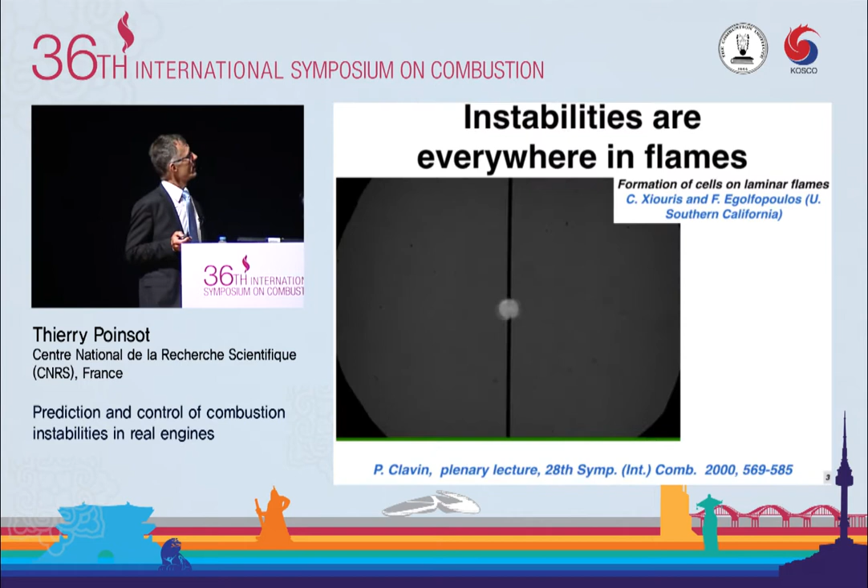Instabilities are basically everywhere in combustion. Even for the simplest problem of making a small spherical laminar flame, very rapidly, instead of having a smooth surface, you end up having wrinkles everywhere, cells, and all these cells are going to make our life very complicated because this device, for example, is used to measure flame speeds. Right away, you see that even at the smaller scale, you have instability problems.

If you go to large scales now, you also have instabilities. If you try to do a pool fire, you're going to see these big puffs, for example, which are due to the coupling between combustion and buoyancy.

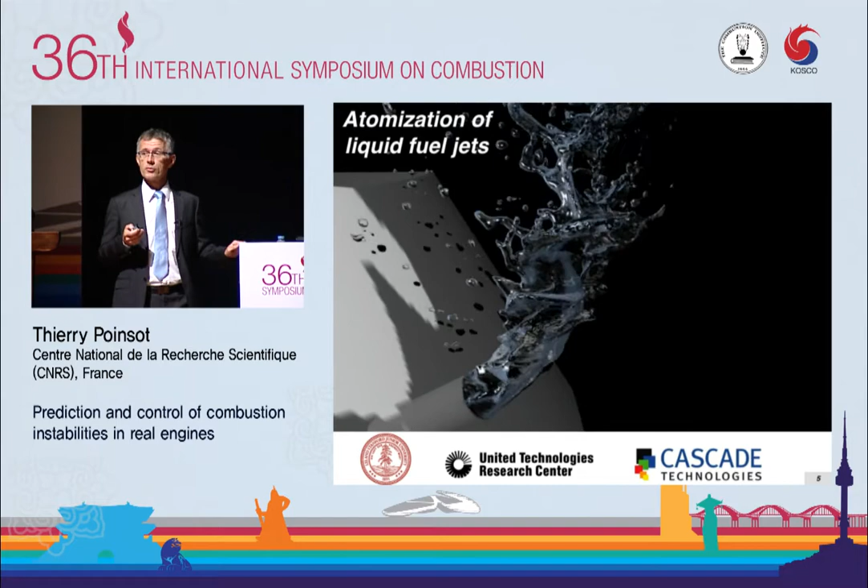Now, sometimes instabilities are useful. If you want to atomize, for example, a liquid jet of fuel, it's very useful to have instabilities at the liquid-gas interface, and we rely on this instability to produce the droplets, which we will later burn. There will be a lot of acoustics today, so you see it's already happening.

So now, among all the instabilities in this combustion world, one of them is unpleasant: thermoacoustic instabilities. Why? Well, because they basically break engines. I will show you that today.

And these instabilities are due to a coupling now between acoustics, like this one here, and combustion. There's been quite a few very good review papers and books, including plenary lectures at the Symposium, and my objective is not to repeat them. I just need, for a few minutes now, to introduce the basic mechanisms which lead to thermoacoustic instabilities.

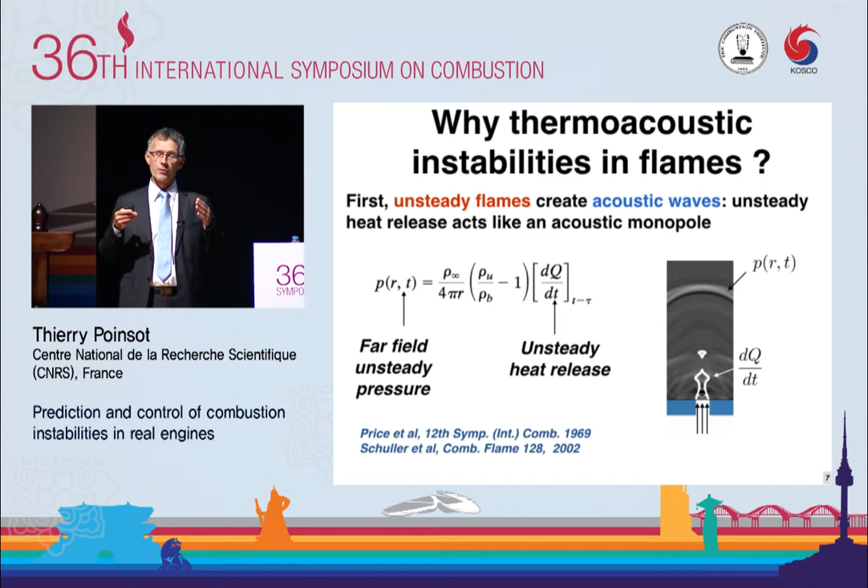So the first one is the fact that flames produce acoustic waves. There will be a few equations today, not many, but I just want to focus on that one for the moment. If you have unsteady heat release in a flame, then it's quite easy to show that in the far field of a flame like this one, you're going to have sound. So a steady flame does not make noise, but if a flame starts moving, it will make noise.

It's beautifully illustrated on this movie here, where you have a Bunsen flame which is pulsated and oscillates, and you see that every time you have a change in flame surface, so every time you have a change in heat release, you make these huge acoustic waves here, which are visualized by the divergence of the velocity.

So that's one part of the problem. The other part of the problem is that flames are also very sensitive to acoustic waves. If you send, for example, acoustic waves onto a flame—this is again a simple Bunsen flame—you have this kind of behavior. You can see how the flame here is modulated by the sound that you send.

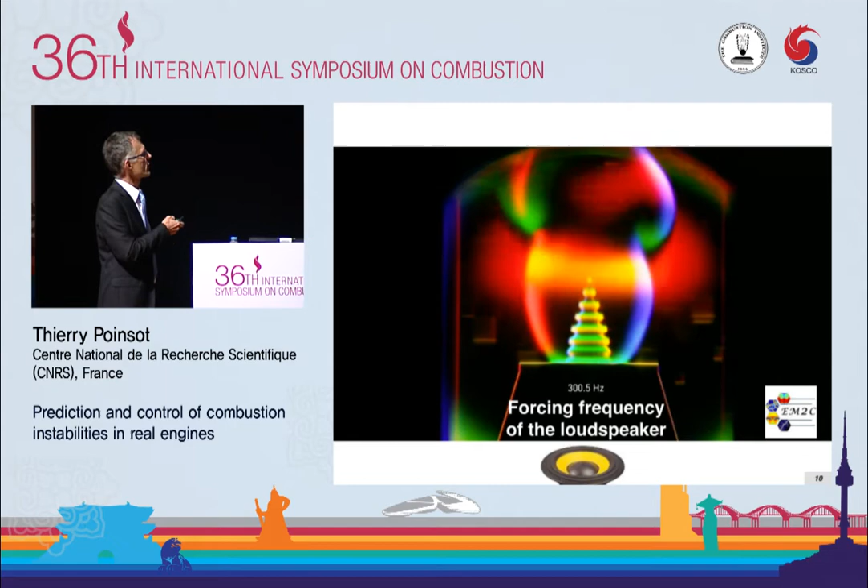You don't have to send only harmonic waves, you can also send music if you want, the result will be the same. You see how the flame reacts to that.

Now, if flames are influenced by acoustics, and if flames influence acoustics, then there's this possibility that you can have a resonant loop between these two phenomena if certain criteria of phase and gain are satisfied. It's not always happening, but when it does, the level of noise increases, and then you end up with these kinds of things here.

By the way, you see the main problem of people working in this field is that they become deaf after a short time. And you see how unpleasant it is. Now, this is a small engine—it's not an engine, actually. It's a lab-scale experiment, which is built to resist. If this happens in a real engine, then you have a major problem.

Now, this is another view of another experiment. That's from the 80s, the experiment of Berkeley, where you have a flame stabilized behind a backward-facing step. And you see that for this case here, you have a very strong unstable mode where the flame flashes back into the inlet. And we now know more or less the mechanisms here.

The mechanism is the following: you create a large vortex. This vortex will burn. When it burns, it will produce acoustics, as I've said at the beginning of this talk. These acoustic waves will create a new change of the flow rate here, which will create a new vortex. And in certain conditions, this thing basically gets self-amplified.

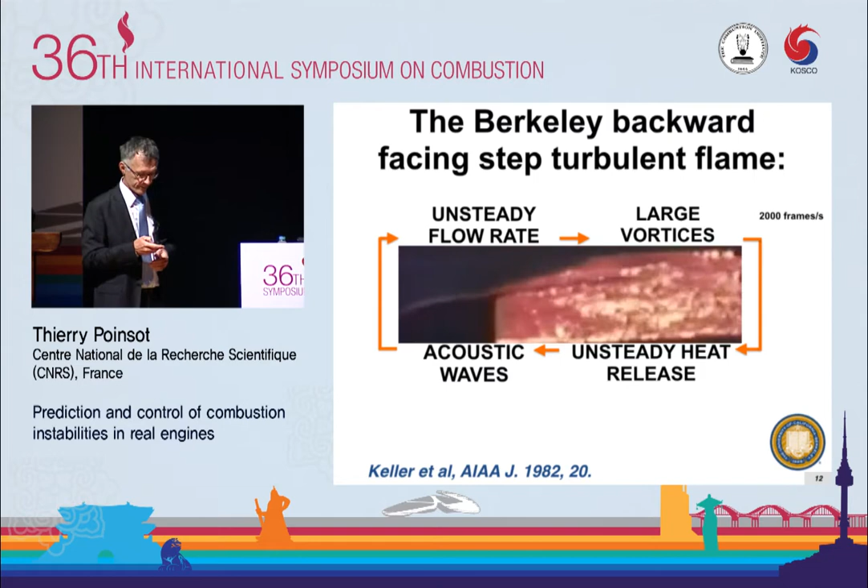Note that in a system like this, at certain instants, the velocity becomes negative. That's why the flame is actually flashing back. So it's a combustor where the flow exits the combustor through the inlet. And I think everyone understands that it's a bad idea.

Now, if this thing wants to move, why do we need to discuss real engines? Well, it's because we need to move away from lab-scale systems to this kind of engine. Because in this engine, if we have a combustion instability, it's not an interesting research problem anymore. It's a major problem, a major risk in terms of the program itself. So this is why we need to discuss this kind of problem.

The most famous example of a big problem related to instability is the Apollo program and the F1 engine. The F1 engine was built from a smaller engine. It was upscaled, and then it became unstable. There's a very nice paper by Oefelein and Yang which summarizes all the methodology used at the time to try to fix the problem.

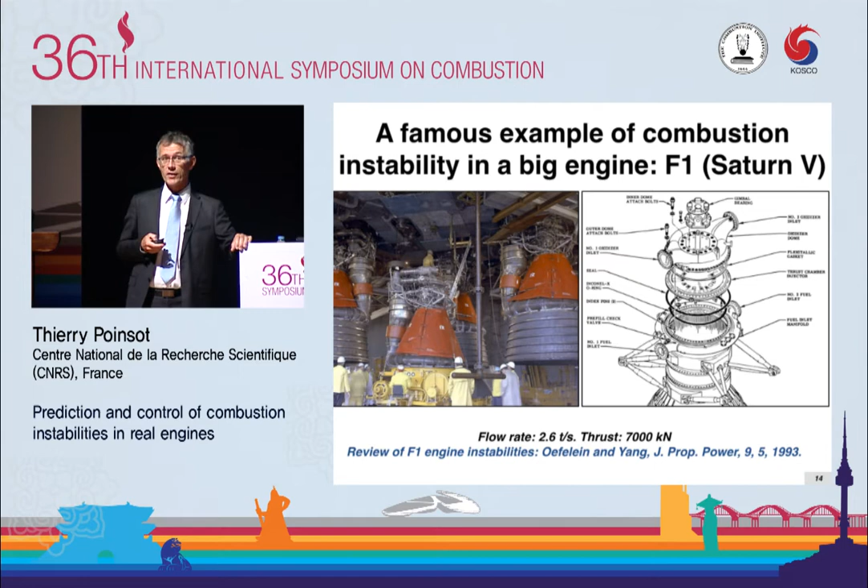To make it short, what you have to remember is that those guys had to do more than 1,000 full engine tests. That's not a lab scale, it's the real engine, to try to find a way to fix the problem. The way to fix the problem was to change the injectors. Let me go back here. Change the injectors, add some baffles to damp the acoustic waves. The way they did it was basically by trial and error. So it lasted 2 years, and the cost was amazing.

So this is why acoustic combustion instabilities are not just a curiosity and an interesting fundamental problem for the combustion community. They are a major risk. And today, the situation has not changed. If you build a new engine, you have to face combustion instabilities at some point.

Now, my objectives today are to present quite a few examples of instabilities in real engines. I will also describe results obtained in lab-scale experiments when they are relevant for real engines. And I will use 3 methods to do that: experiments, LES (large eddy simulation), and theory.

Experiments, that's an interesting problem right away. If you do experiments in the lab, you know that today we have methods to measure full 2D, even 3D fields of species, radicals, flame position, velocity, and of course pressure.

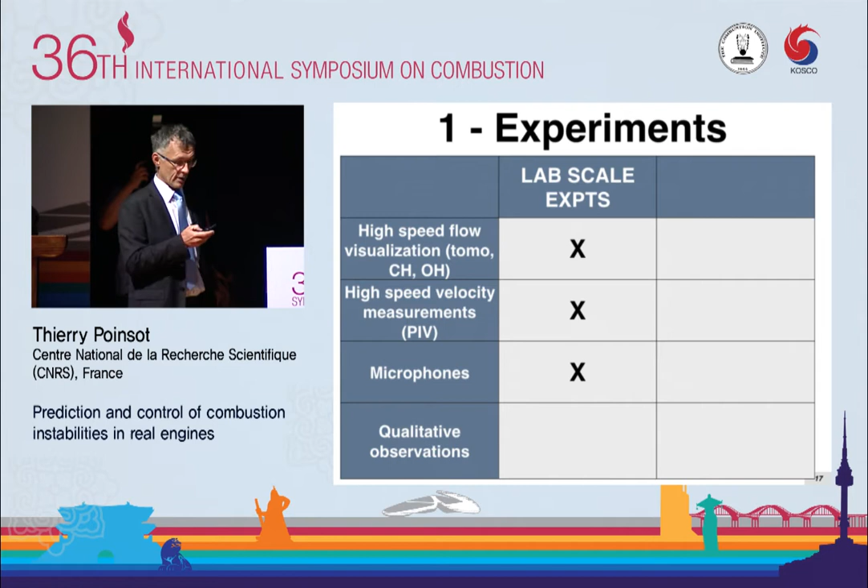If you go to a real engine, well, usually you don't have that. In most cases, what you have is that this engine makes noise, or it vibrates too much, or it's just exploded, and we don't know why. In the best case, you're going to have maybe pressure measurements, microphones. But that's all you have. You don't know what's going on inside. So you're basically blind as far as it goes to the problem of what are the unsteady phenomena in this engine.

So here you need something to put your eyes inside the engine, and this is where the LES comes into the picture. LES is a way to create a virtual burner. In that case, we'll be able to use LES to probe what's going on inside the burner. And the LES revolution, maybe 10 years ago, has allowed us to build things which look - they are not exact of course, but they look like the real engine, and they capture most of the unsteady activity in the engine so that we can actually use them to try to understand what's going on.

So it's actually interesting to see that many companies in industry have moved or are trying to move today to LES, not to compute the mean flow or the pollutants, but usually the first motivation is because they are afraid of combustion instabilities. And they know that the best method to try to control that is LES.

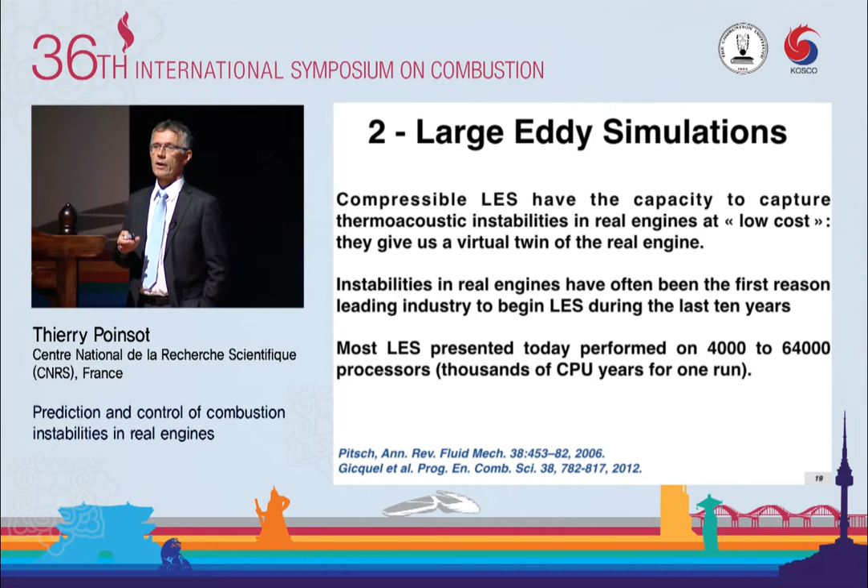Of course, this is only possible today if you have massively parallel computations. And most of the simulations I'm going to show today typically require thousands of CPU years. So it's not cheap, but compared to a real engine, it's still not that much money.

So the third method I wanted to mention here is theory, and I will insist today, and I would like to convey this message to the young people in the room. You might think that if you have all these nice computers and all these big lasers, we don't need theory. And actually, what I want to prove today, by multiple examples, is that we need more people doing theory in the combustion community. Just a pen and a paper, and we don't have enough people doing that anymore. We used to have many theoreticians in this community, and we don't have enough today. I will give examples of that.

So let me move now to the description of what real engines are. And I will basically try to illustrate that by comparing real engines to lab-scale experiments. So what is different if you try to study a full engine?

The first thing is that the Reynolds number and the Damköhler number are going to be much larger in a real engine because they're more powerful and larger. That's an obvious difference, but in terms of modeling it raises questions for us.

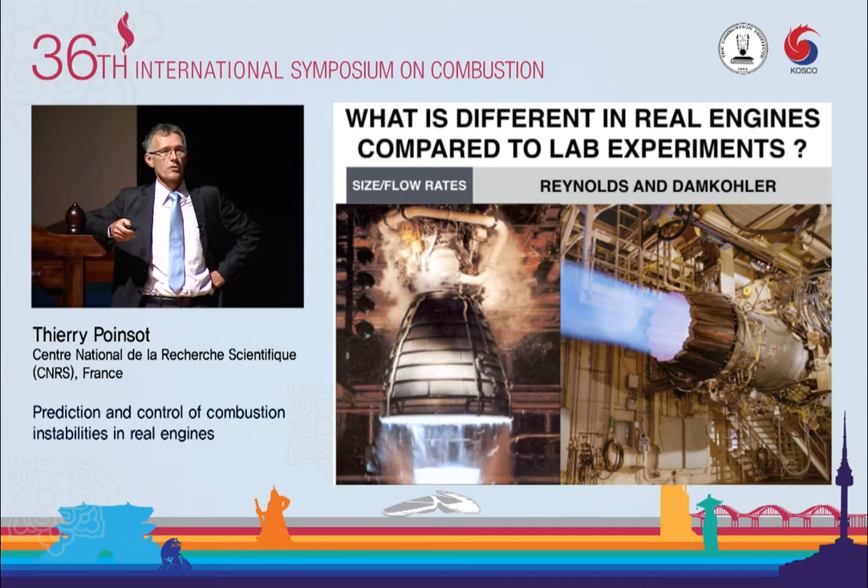The second difference is that the shapes of these chambers are different. This is an example of a lab-scale experiment, which we call the Volvo rig in this community. It's a rather simple experiment, but the geometry at least is simple: a long tube with a triangular flame holder. The flow there may be complicated, and this is an LES of this flow. The flow may be complicated, but the geometry is simple.

Now, if you go to a real engine, it's a different problem. The geometry is going to be complicated, and of course then we expect the flow to be even more complicated. That's for a gas turbine.

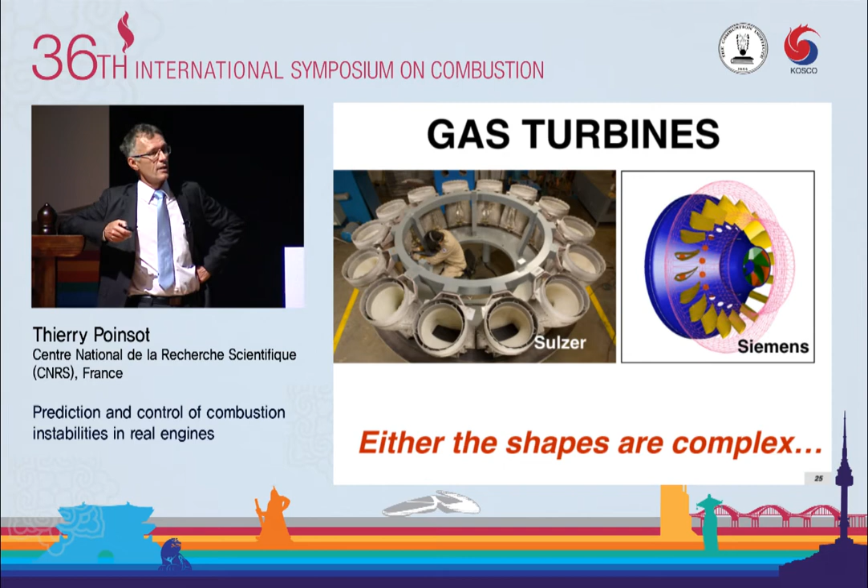If you go to a rocket engine, it's a bit different. The elementary piece here is a coaxial jet, where you inject usually one reactant in the middle, and around it you supply the second reactant. So that's a simple geometry, but unfortunately you have too many of them. In an engine like the Vulcain engine, you have 566 injectors. So that makes your life much more complicated.

Now, another difference is the regimes of combustion. I know that in this room, basically people are split into two categories: those working on diffusion flames on one side and those working on premixed flames on the other side. They even have separate workshops usually. In an engine, it's not working like this. We don't have premixed engines and diffusion engines.

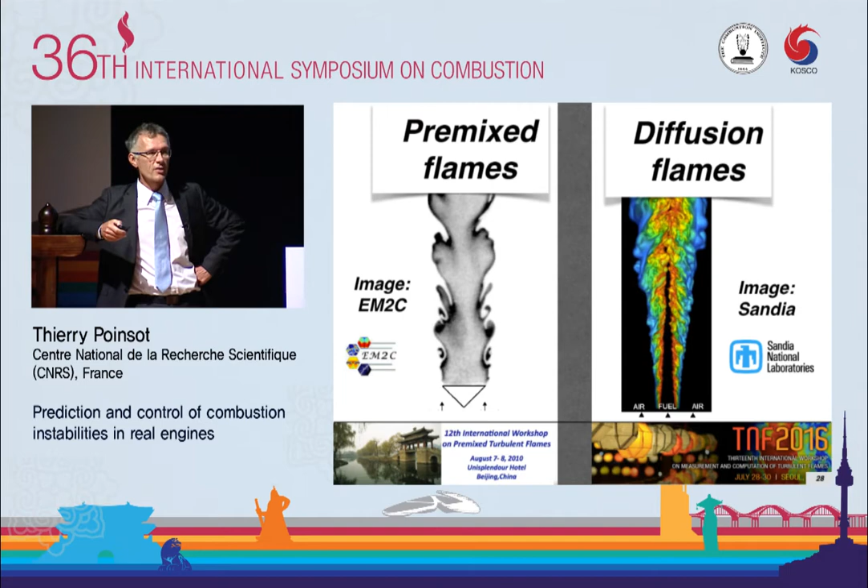If you look at a gas turbine like this one, and you do an LES of this thing, you find out that you have premixed flamelets at certain points, and diffusion flames at another one in the same flow. So we right away guess that most formulations, most models that we use are not going to work when we try to apply them in a full engine. So that makes things a little bit more complicated than what we can do in the lab.

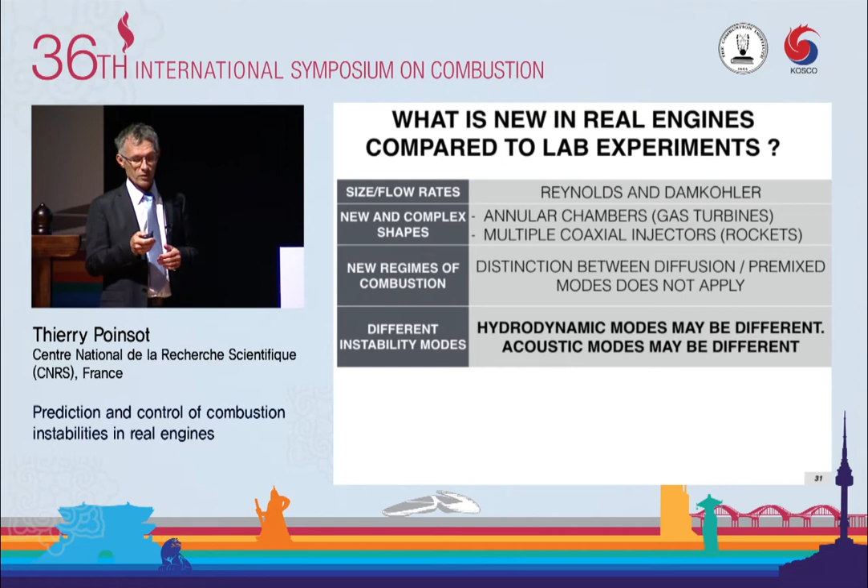Now, another difference is different instability modes. I will talk here about two categories of modes: hydrodynamic modes, vortices if you want, and acoustic modes. Let me start with hydrodynamic modes.

We know, and have seen for a long time, that in many thermoacoustic phenomena vortices play a big role. That was indicated even a long time ago, in this book by Reynst. Reynst was working on unsteady combustion before the Second World War, and even at that time he was plotting things like this, saying that if you create a vortex like that in a chamber, you have a big danger of going into some kind of thermoacoustic mode.

Actually, these vortices, this type of vortex, we saw a bit later. That's an old paper, an '87 paper, showing vortices created in a premixed chamber, and you recognize exactly this shape here. So that tells us right away that the way the flow can organize itself into coherent structures is important for thermoacoustics.

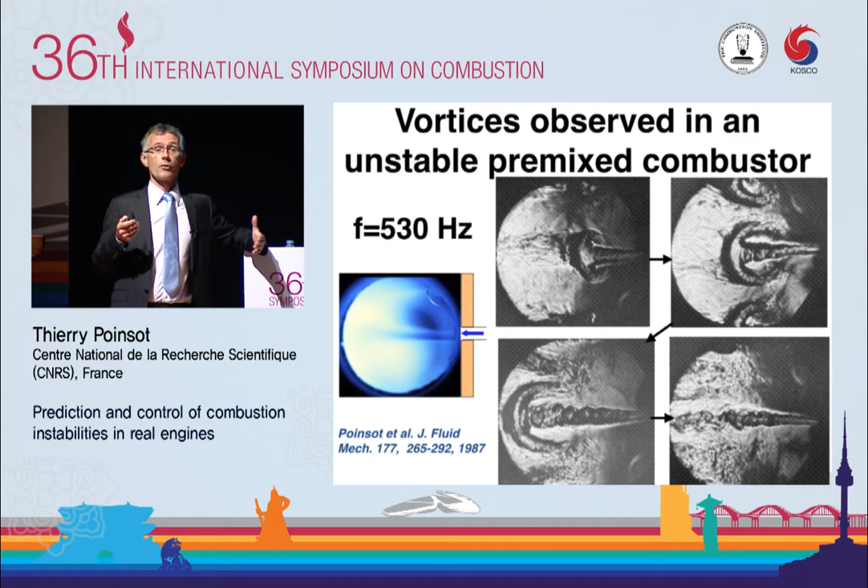Now, how do you study that? Well, people who do non-reacting flows have looked at that for a long time; it's called linear stability analysis. I'm going to take one example of such flow, taken by famous people here. Monkewitz, with Huerre, was one of the specialists of these studies.

You look, for example, at the flow behind the triangle here, behind the flame holder. The velocity profile will look like this, and the temperature profile will look like that. This is cold, TU; this is hot gases, TB. And you can write theory to look at how unstable this flow is going to be, which will depend on the ratio TB over TU, the temperature ratio.

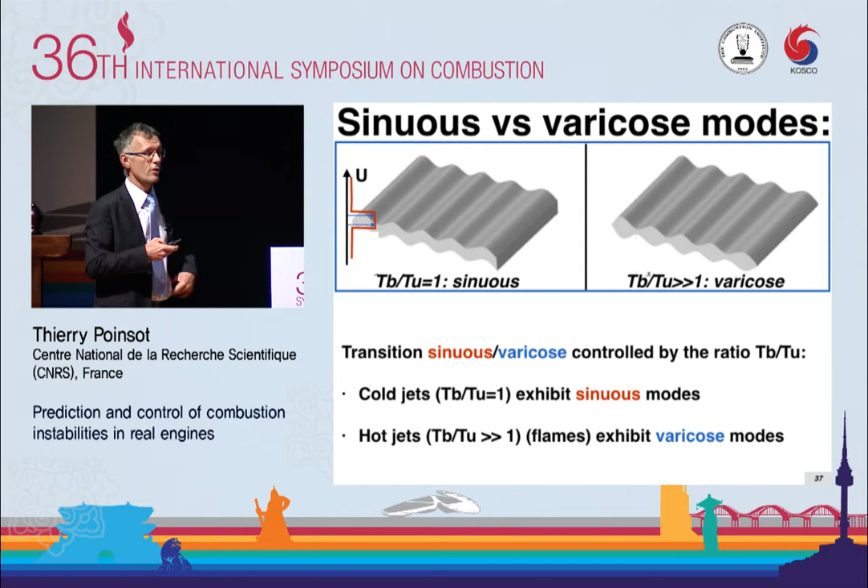When you do that, if you start by looking at a case where TB over TU is unity, so it's a cold flow, what you have is a sinuous mode—the flow organizes itself to have this kind of movement. But if TB over TU is larger, this movement completely disappears and you have a varicose mode instead, which is very different. And of course, you expect that in this case or that case we're going to have very different acoustic modes after that.

Now, interestingly, we should wonder what is the ratio TB over TU in practical cases. If you look at lab-scale experiments, you know that in most cases we use cold air.

We don't like to heat up the air, it costs a lot, so we use TU equal 300K. So TB will be of the order of 2000, meaning TB over TU will be like 6 to 8. But if you look at a real engine, it's different because there we compress the air to 700K or 800K, and usually we can have a lean flame too. So TB over TU can be anywhere between 1.3 and 3, maybe 1.5 to 3.

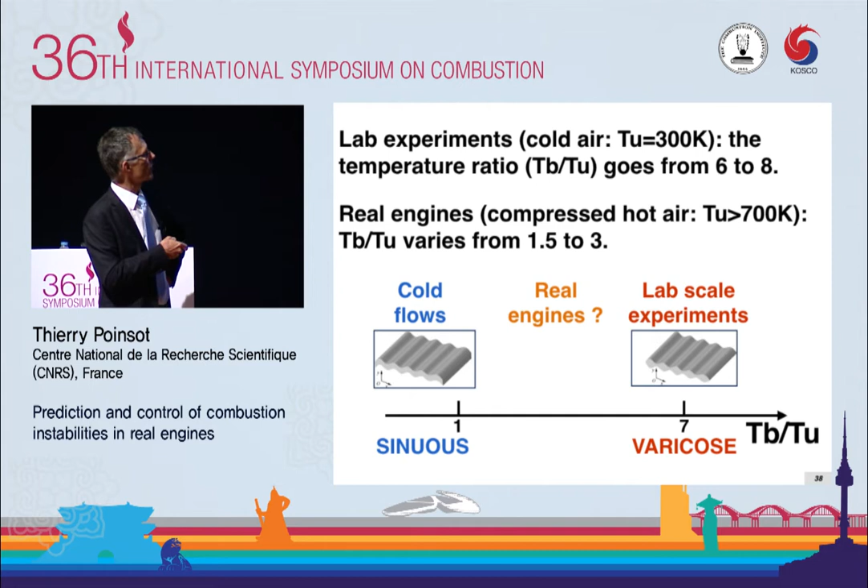This means that in the cold flow we have a sinuous mode, in the lab scale we have a varicose mode, and real engines are somewhere in between. This problem was studied by Emerson and Lieuwen a few years ago, and they showed that for TB over TU equal 2.4 you get something like a varicose mode, but if you go to TB over TU equal 1.7, you get a sinuous mode. This tells us that if we want to study real engines in the lab, we have to use the same temperature ratio, otherwise we're going to miss a very important aspect, because it's not going to trigger the same instabilities as the varicose mode.

Another big difference is related to acoustic modes. If you look at the literature on acoustics, you'll find that 95% of it is dedicated to low-frequency longitudinal waves, where the acoustic waves interacting with the flames are actually propagating in the same direction as the flow. If the flow is going that way, the waves are going upstream or downstream.

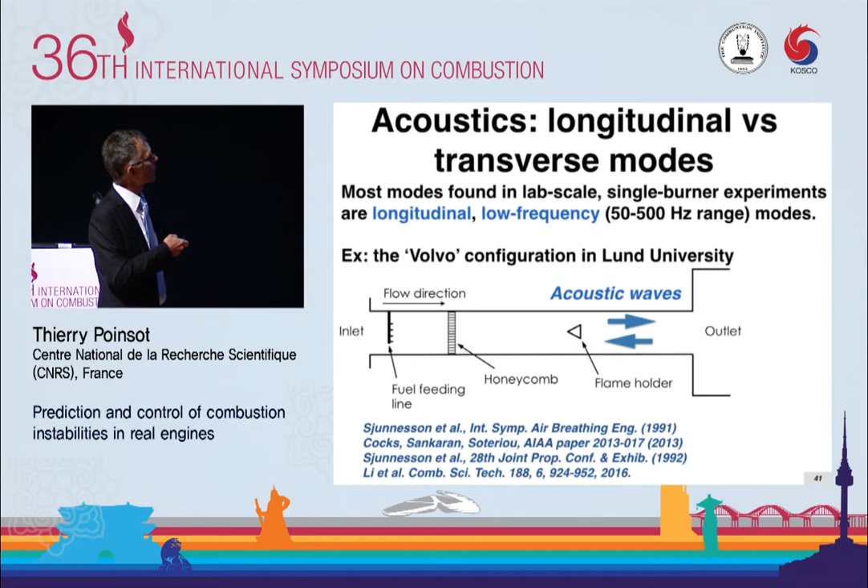Now, the problem is that in many cases, especially in real engines, you also have transverse modes. What is a transverse mode? It's the same thing, except that now the waves are traveling in the other direction. So instead of going in this direction, the acoustic waves actually propagate in this direction. And when they do that, they are usually at a higher frequency, of the order of 4,000 hertz for example, in that case, in the paper of Rogers and Marble.

Those waves have another characteristic, and it's that they are much more dangerous. If you trigger a high-frequency instability in an engine, usually you end up with an explosion after a few seconds.

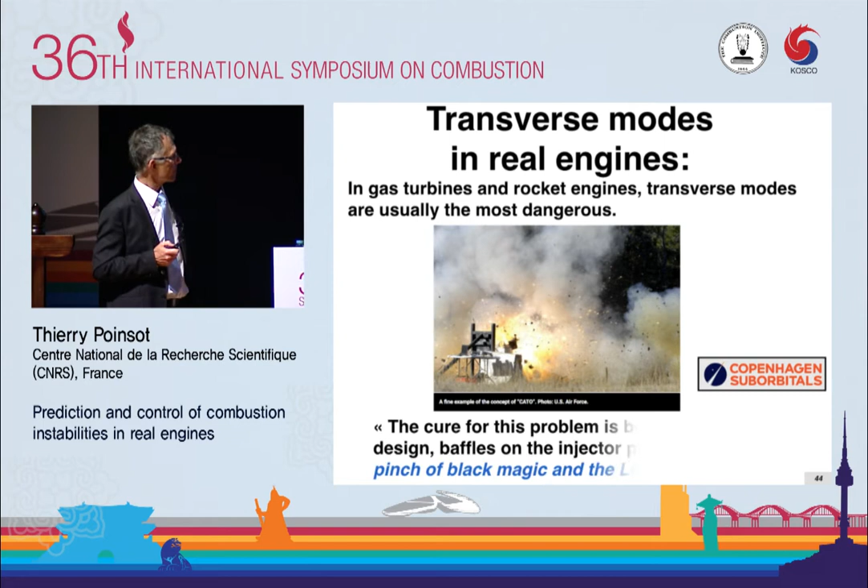I picked up here a sentence by this company, Copenhagen Suborbitals, telling you how much we know, how much we understand, and how we try to fix those problems. The recommendation of those guys is this one: if you want to fix this problem, you need to pray. And if you are managing a big industrial program, you realize that this will make you nervous.

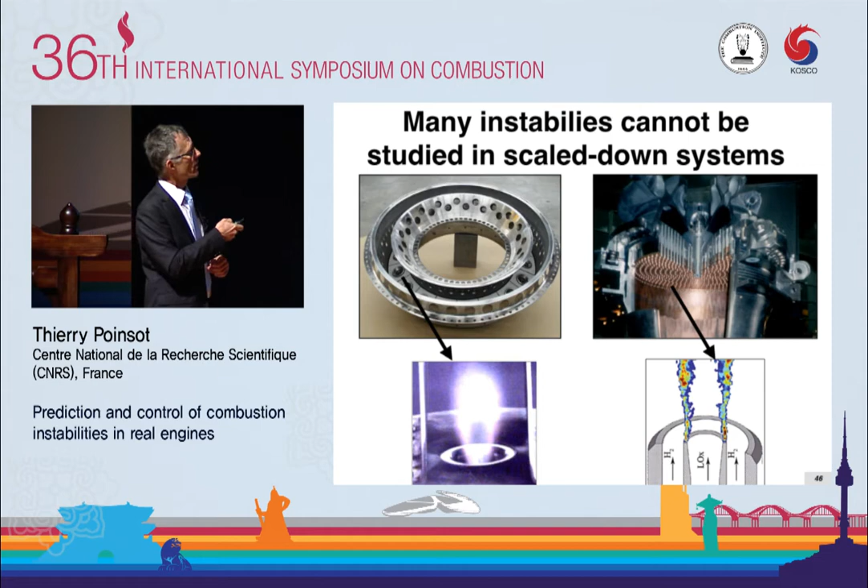Next step, of course, will be to say we need to understand what's going on in the real engine. Can we just take a piece of it to capture the instability modes, to try to study it in the lab? Unfortunately, that does not work. What you would like to do is take, for example, this gas turbine combustion chamber, pick up one injector, put it in the lab, and just study one at a time. Same thing for a rocket engine, you would like to pick up one injector and just study this one. But that does not work, because the acoustics will be different.

This was tested actually by Crocco a long time ago. He took a rocket engine and tried to block part of it, and what he proved was that every time you change the engine, you have a different unstable mode, even if you keep the same injector. So you need the full engine if you want to capture the acoustics. It's certainly not true if you want to do only mean flow studies, but for combustion instabilities, it's required.

Next difference is boundary conditions, and that's also a big one. As I've said, a lot of things were controlled by acoustics, which really means you need to know if a wave is leaving the combustion chamber, how much is going to come back. That's called the reflection coefficient, it's an acoustic notion, of course, and you have to determine that at the outlet and at the inlet.

In laboratory cases, it's kind of easy to impose boundary conditions. In many cases, we impose that the flow is blowing into the atmosphere, and we know that pressure is imposed, which is fully reflecting. And at the inlet, normally, if you have a serious experimentalist, he has a choke nozzle, so you know that the flow rate is imposed.

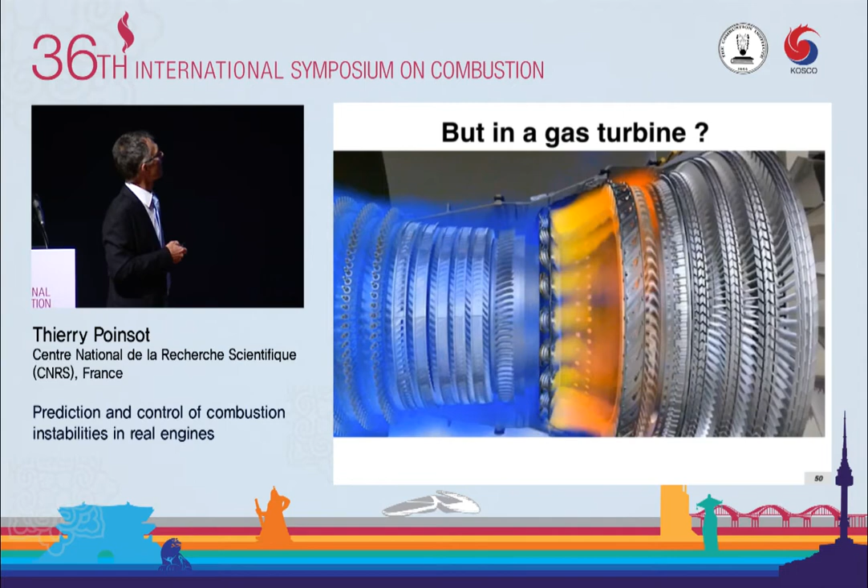But in a real engine, things are different. In front of the chamber, you have the compressors, and after the chamber, you get the turbine. So the chamber is surrounded by strange elements. On one side the compressor, on the other the turbine, and you need to know if waves propagate in this direction, how much is coming back. Same thing on that side. Otherwise, you cannot study the instability of this engine. So you need the reflection coefficients there.

And that, of course, is not a combustion problem anymore—it becomes a turbomachinery problem. You need to be able to do simulations where you send a wave into a stage of a turbomachine and see how much is coming back. In itself, that is a very complicated problem, which is not combustion, but you need it.

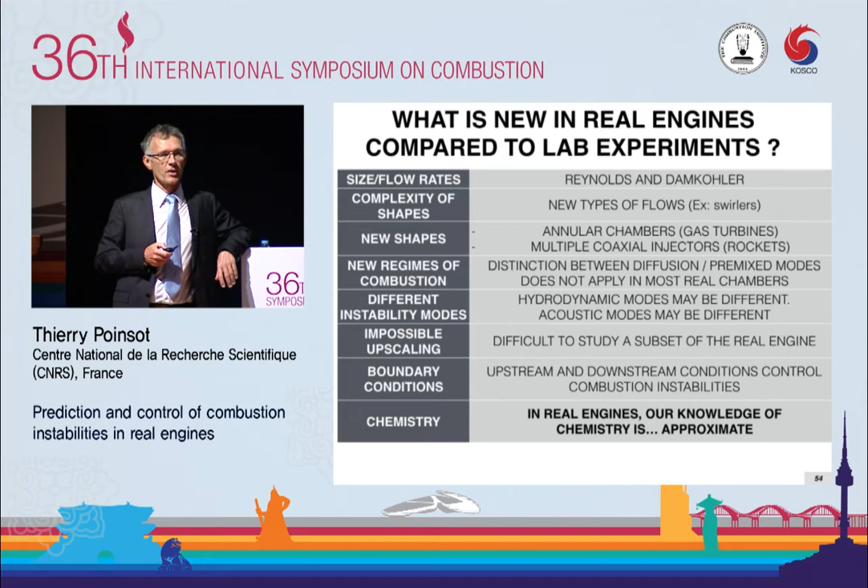I added this slide yesterday night because I know how many chemists would be in this room. I'd like to add that our knowledge of chemistry in this engine is very insufficient. That's a message to the chemists. I think everyone here will certainly argue about the flame speed of a methane-air flame at 300 K and 1 bar, okay?

I think Fokion will tell me it's 36 centimeters per second. Others will tell me 38 or something. But I don't really care about that. I'd like you to tell me what's the flame speed of this thing at 20 bars, 800 K, and an equivalence ratio of 0.5. Well, we don't have the answer to that in an experiment. No one does these experiments.

And if you run the usual full chemistry schemes, the error is not a few centimeters per second—the error is more like 200%. So if you want to do LES with that, you don't know what to do, basically. We don't know enough about chemistry here. And if you go to a rocket engine, it's even worse. At 120 bars, depending on the scheme you use, flame speed can vary between 20 and 40 meters per second. That's a big problem, because if we want to use LES, we need good schemes. If we don't have the chemistry, we cannot do anything. So that's a major problem too.

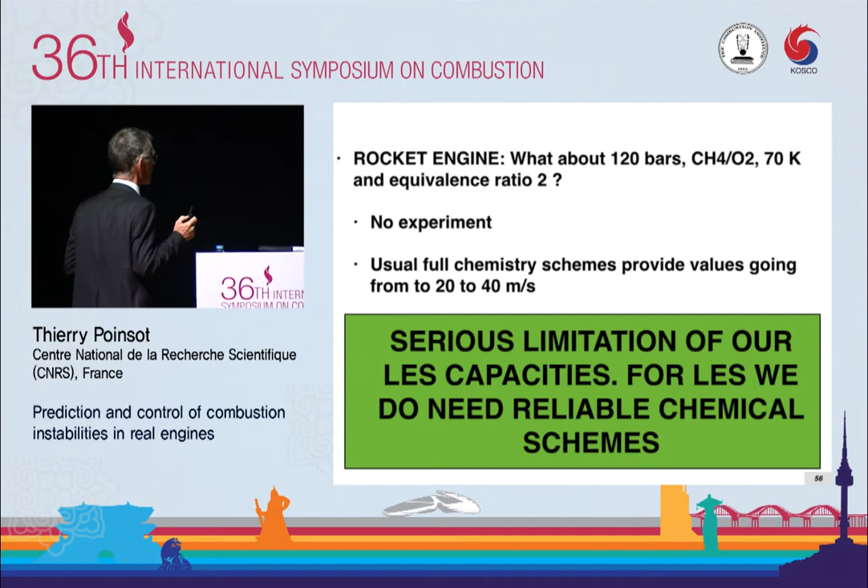Let me move now to the next point, which is gas turbines. You find gas turbines in many places. I want to describe a little bit the configurations here, and I'm going to do that using a result of a joint study between CERFACS, EM2C, Cambridge, and NTNU.

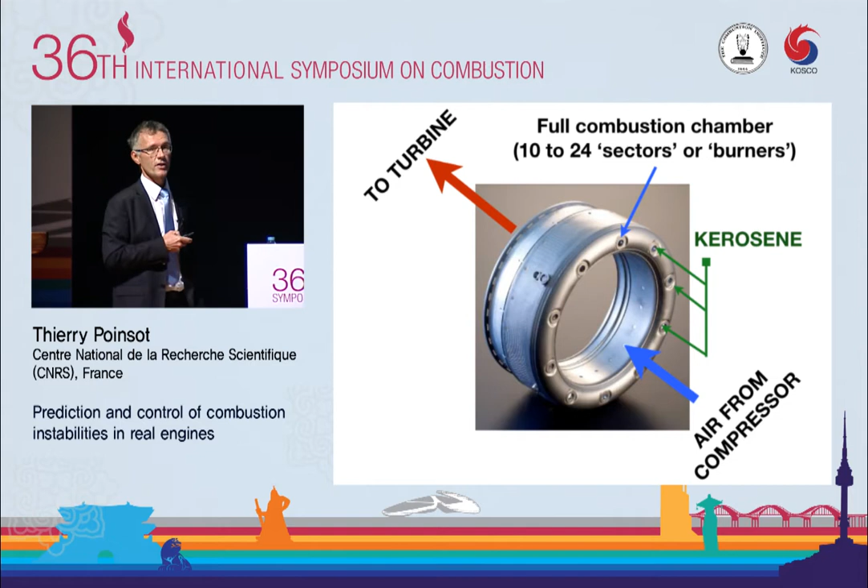To remind you how a gas turbine works, we have the combustion chamber here. The air comes from the compressor, goes to the turbine. We inject the kerosene in different places—it can also be methane. We have sectors here, and each sector corresponds to one injection of kerosene. In a given chamber, you can have 10 to 24 injectors.

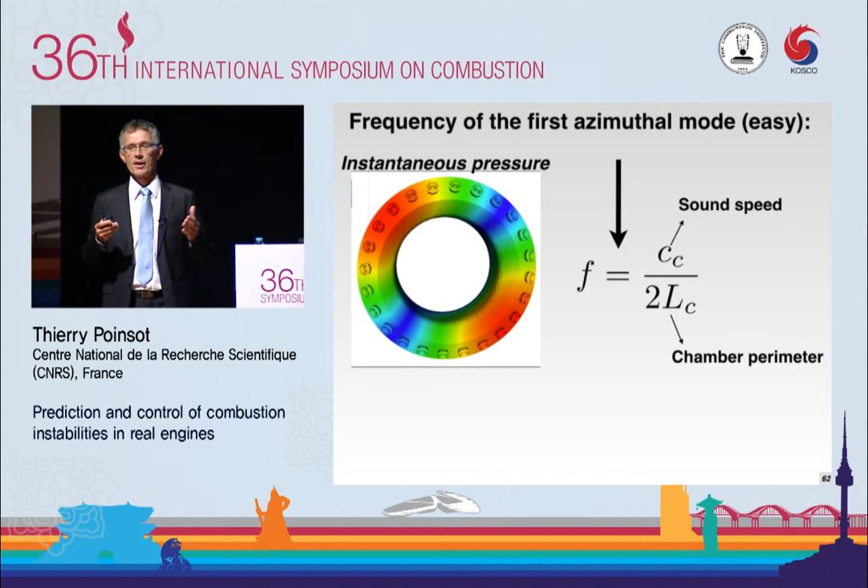A specific point about gas turbines is that they have this annular shape, okay? And since they have an annular shape, it's now allowed for acoustics to follow this path. So an acoustic wave can actually travel all around this chamber, meaning we can have an acoustic mode, and the first mode frequency can be obtained easily just by dividing the sound speed in the chamber, which is of the order of 700 meters per second, by the perimeter of this chamber.

So this number is usually of the order of 600 to 1,000 hertz. Actually, this mode is degenerate because there can be two modes—it can be turning in the clockwise direction or in the counterclockwise direction.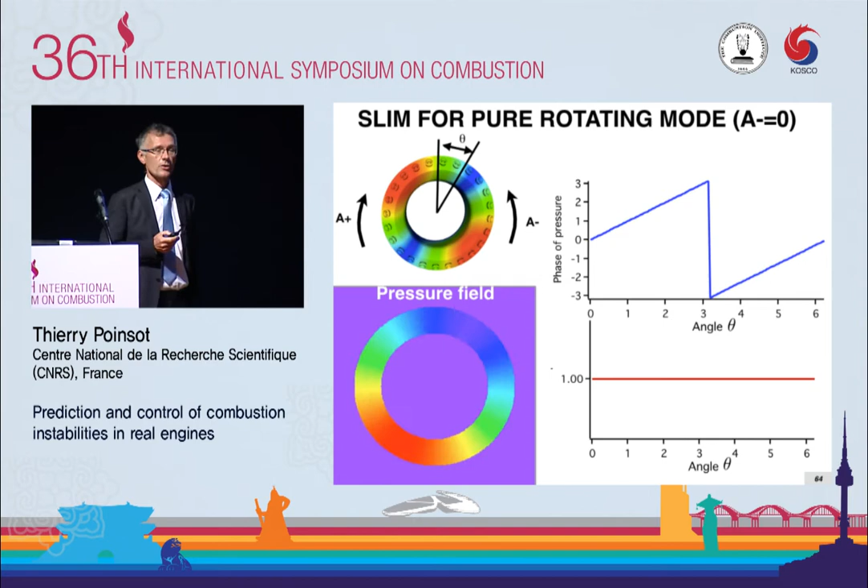If I take A plus equal A minus, we have now a standing mode. You can recognize pressure nodes here and here. And the phase now is opposite — this point is oscillating in an opposite way to that one. And if you have A plus and A minus different, you will have what we call a mixed mode, where the shape can be anything of that type.

In real chambers, what's interesting is that we find both standing and rotating modes. We don't really know why, though we have quite a few indications. We believe it's probably due to the amplitude of the instability or to the shape of the chamber, whether it is perfectly axisymmetric or not. The modes can also oscillate between standing and rotating in the same machine over time. So you can have a standing mode in this machine, come back one second later, and then it will be turning.

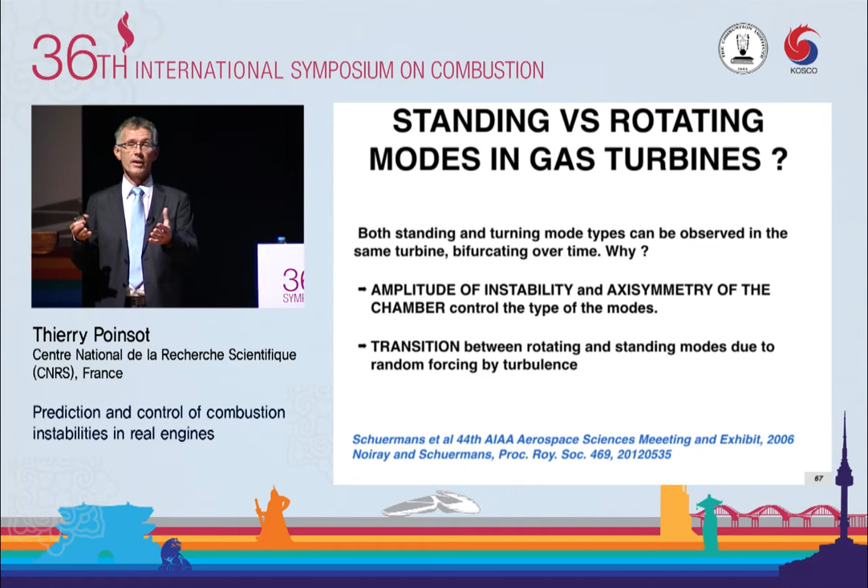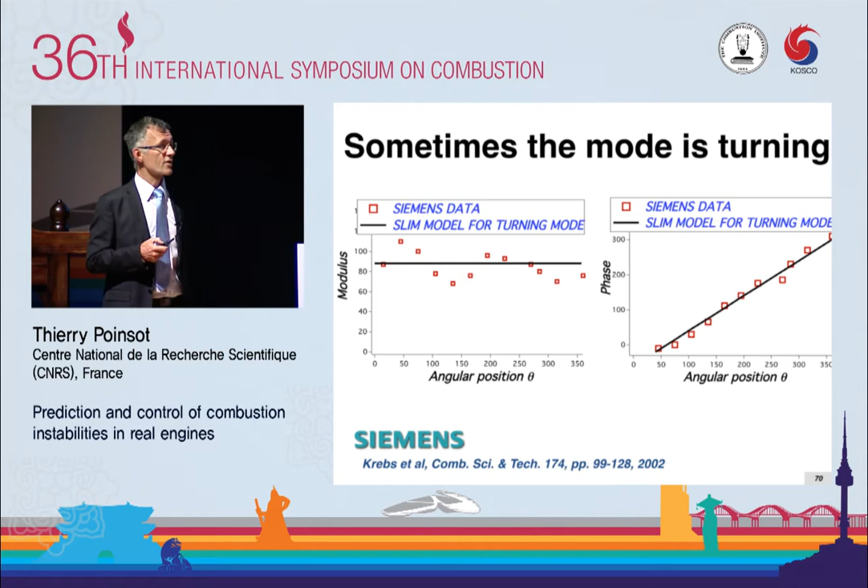This tells us that at this moment, in this chamber, they had a standing mode. Interestingly, they also made measurements a few minutes later, and then they had these measurements, which correspond much better to a turning mode. So you can have in the same chamber a turning mode or a standing mode, and Siemens was actually the first to demonstrate that.

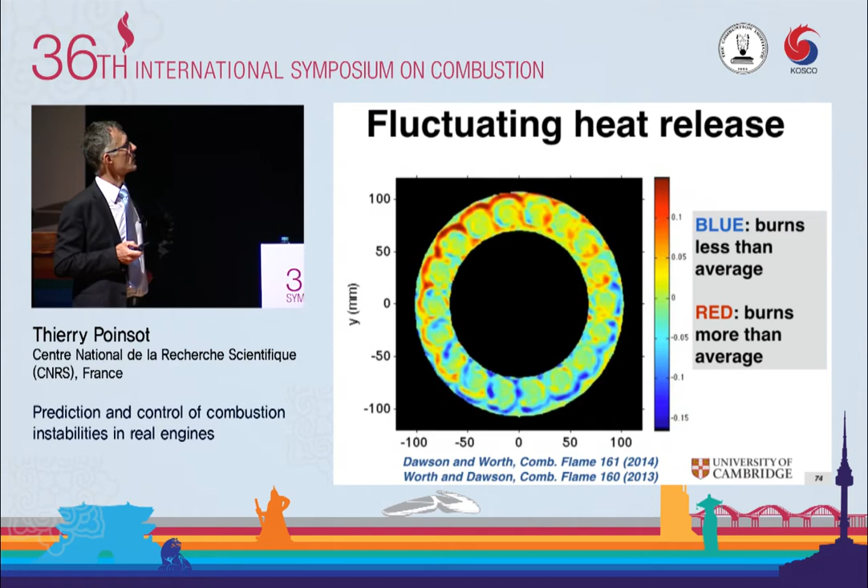A few years later, other groups started looking at azimuthal modes, building annular chambers in the lab, which is difficult, but you can do it. For example, Cambridge had this chamber where you can look at the flame from the outlet and look, for example, at the unsteady reaction rate in this chamber. So now you have the unsteady reaction rate — you take the local reaction rate, subtract the mean, and you see that obviously what we have is a counterclockwise mode turning in this chamber.

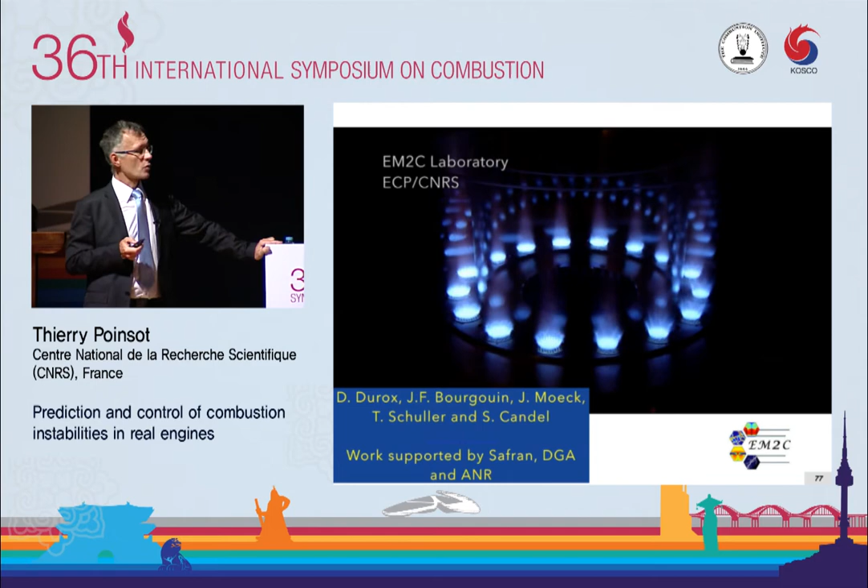So we start having now a few experiments where we can look at azimuthal modes. Interestingly, we actually did the LES before we did the experiments here. The reason for that is that there was a French engine which had problems maybe 10 years ago. We thought they were due to thermoacoustic problems, and so we were asked to do a simulation of the full engine. At that time it was quite difficult, so we said, okay, let's try to do that.

We took one sector, did an LES of this sector, then copied it 15 times, as you can see here, and restarted the simulation on a big parallel machine and just waited. What's happening in this engine is that over time you start developing an unstable mode here, and when this mode grows, it reaches a limit cycle with about the same frequency and amplitude found in the real engine. That was a very interesting result because it's telling us that yes, you can capture a mode like this with LES.

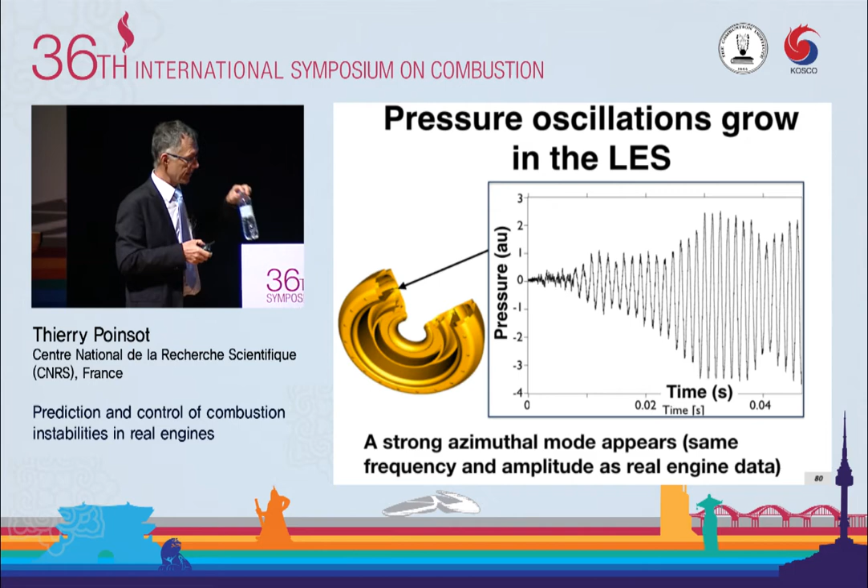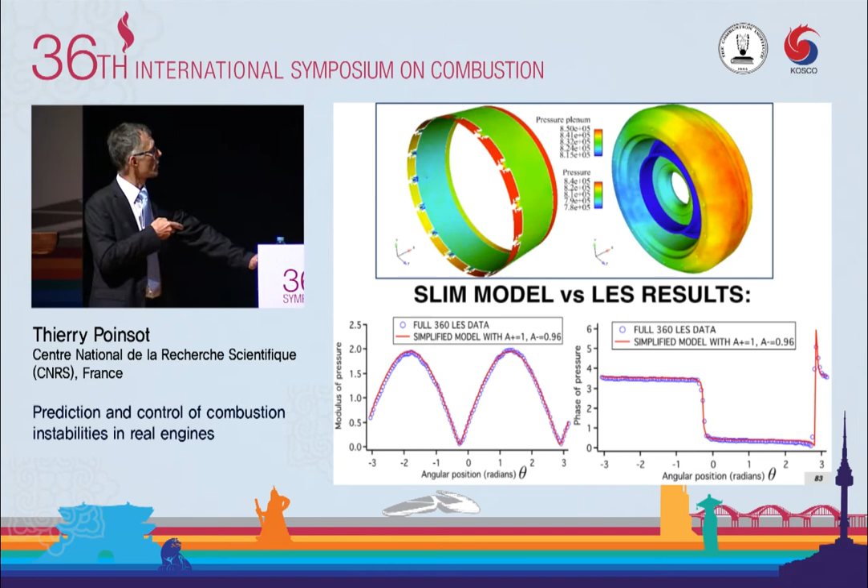So you can again measure now the pressure oscillations versus the angle, and compare it again to the slim model. And you see that you can match the LES here with this very simple model, with A plus equal 1, A minus equal 0.96. So there's a message behind that: even in this complex flow, complex turbine, the acoustic structure itself is very simple. You can predict it with this very simple model.

There's another message behind it, actually. It's that this mode is really close to a standing mode. Even so, your eyes seem to tell you that it is turning. It's actually close to standing because it's close to A plus equal A minus.

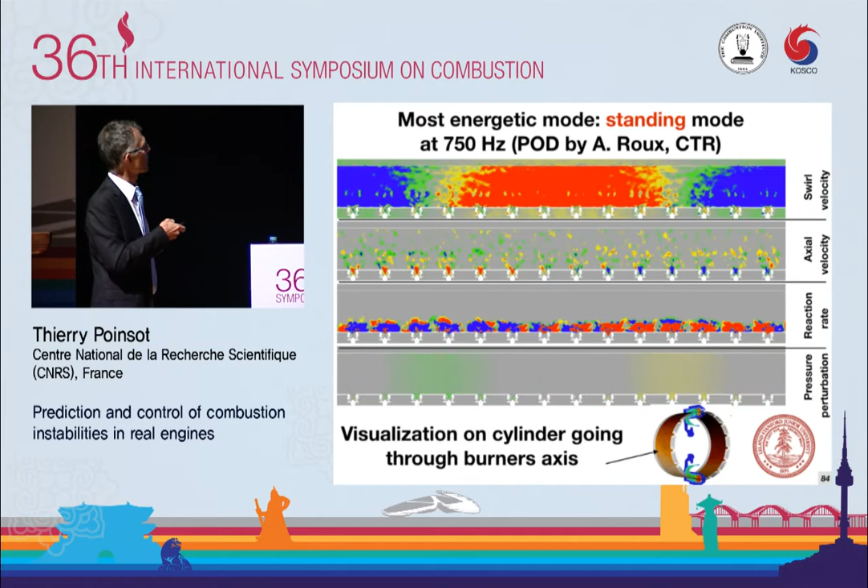Then you can use methods like POD or DMD, which I don't want to describe here. You can take a look at this paper here to extract this mode, and this is what you obtain. This is the most intense mode in this chamber, and it is a standing mode where you have pressure nodes here and there, and pressure antinodes here.

So I'm not going to continue along that path because my message at that point is the following: you can do LES here, and we've done it, and you can do experiments of this engine, and they just tell you, yes, there is a problem, you have an unstable mode. Now, if you want to fix the problem, you cannot repeat this LES all the time. So you have to find another way.

This is where we need to go to reduced order models or to theory. We need to do something more to be faster.

So if we want to talk about reduced order models now, we have to recognize that everything in this problem, almost everything, is controlled by acoustics. And so we could try to solve this problem only by solving the acoustic field and replacing the flames by some kind of loudspeakers. The way to do that has actually been touched by many people in the last 10 years, and I think a lot of people see the potential of these methods now, which are needed in addition to LES and experiments.

So what you do is replace this very complicated geometry. You recognize that not all details are important. You can say that, for example, this annular chamber is like a circle here where waves propagate in one dimension, and the chambers here of combustion are replaced by small ducts, 1D ducts. And the flames here are the only critical problem.

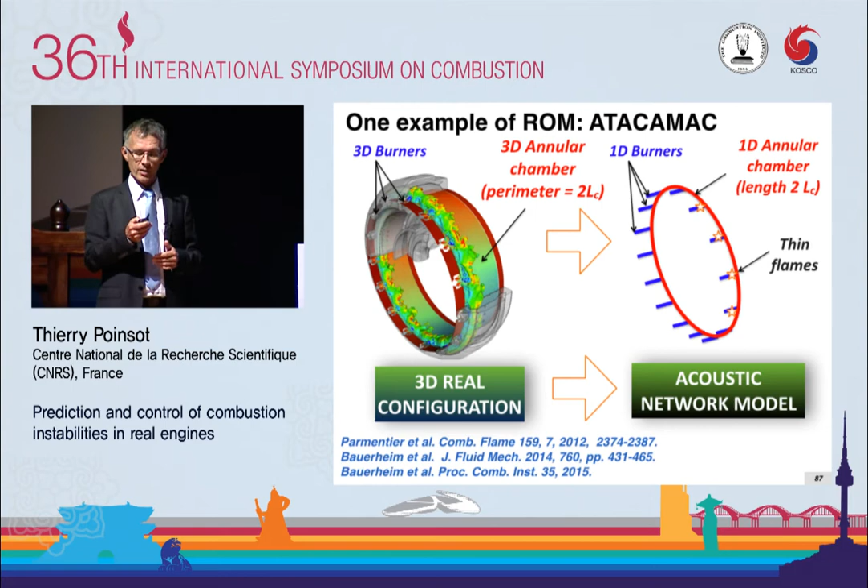You replace the flame using what we call flame transfer functions, introduced by Crocco more than 50 years ago. Crocco said, if you can relate the unsteady reaction rate in the chamber to the unsteady velocity at the inlet, then you can close the acoustic problem. And this is what we use in most of these methods.

And you can recognize here that the transfer function between these two has an interaction index, n, and if the interaction index is close to 0, there is no problem, your flame will be stable. And tau is the delay here. Tau is the time it takes for the burner to react to a pulsation at the inlet.

How do you measure flame transfer functions? You can measure them experimentally, or you can compute them. This is an example for a Bunsen flame here, where you pulsate the inlet with a sinus wave, and you measure the Q prime, the oscillations of reaction rate. Now you have two sinusoidal waves, you can deduce the phase and the gain very easily. Once you do that, you can close completely your equation.

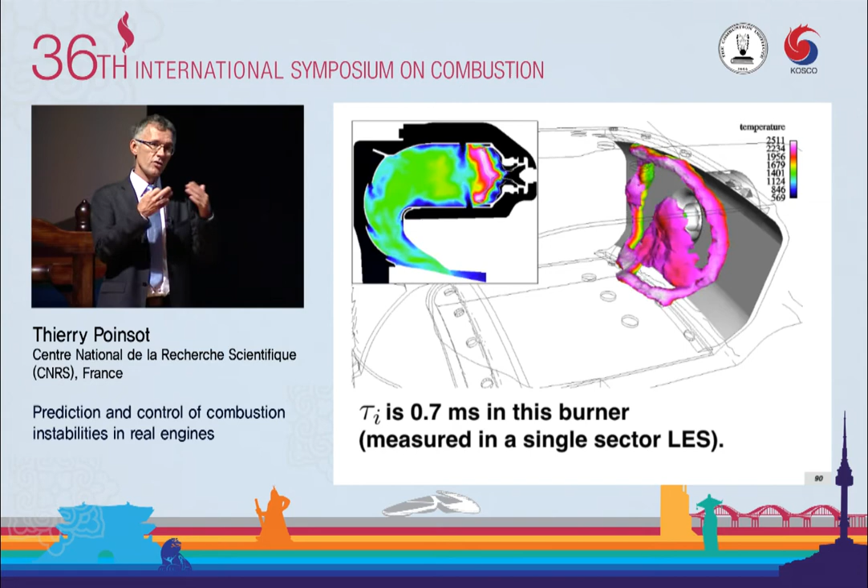For the burner we're studying here, for the helicopter engine, we measured tau here, and it's of the order of 0.7 milliseconds, which tells us that in this engine, when you change something at the inlet, it takes about 0.7 milliseconds before the engine starts reacting.

Now, we developed a method which is called ATACAMAC. Here, I will just keep this name to refer to it. It's going to be faster, which solves all these equations and provides a fully analytical solution.

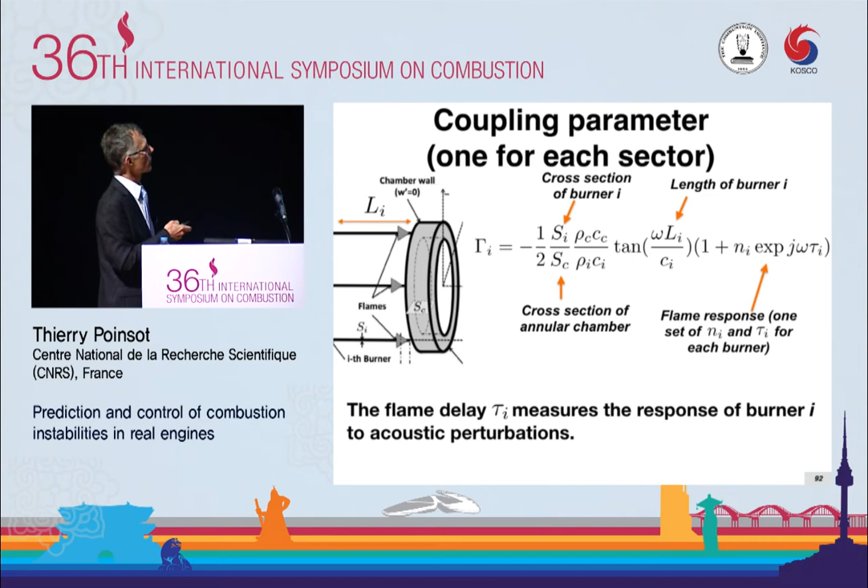What the fully analytical solution tells you is that it gives you the physical numbers which control this flow. They are called the coupling parameters, gamma I. These coupling parameters can be written as a function of the flame transfer function, the sound speed, the cross sections of the different burners, and the length of the burners. So it's something fully analytical—you can just derive it by hand.

Once you have these numbers, you can get the frequency of the mode. The frequency of the modes which appear now with combustion is the frequency you'd have without an active flame, plus an additional correction, sigma, which is just the sum of all the interaction indices. So you have a fully explicit solution, and you just take the real part to get the frequency of oscillation, and the imaginary part gives the growth rate.

If the imaginary part is positive, you're in trouble—you have an unstable mode. If it's negative, you're fine—you have no problem of instability.

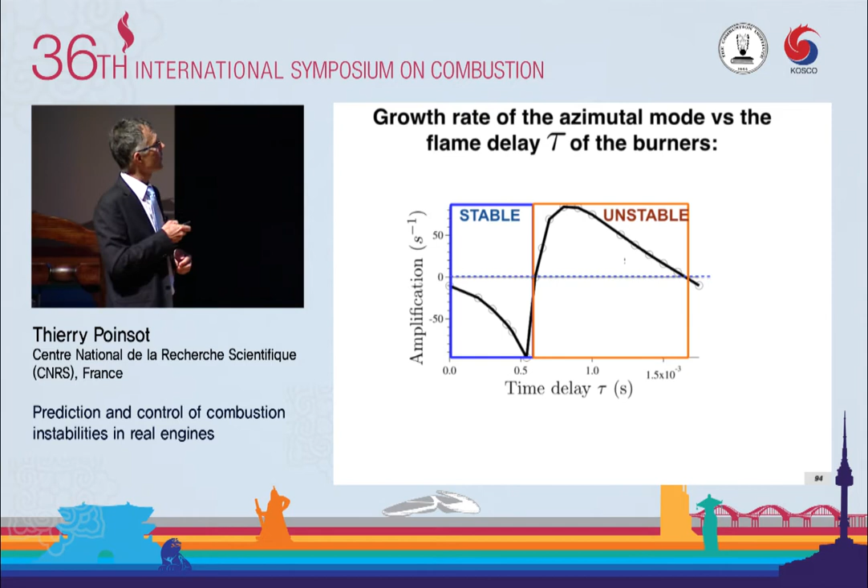And the LES we did was actually exactly here, so it was indeed unstable. That confirms the fact that LES and theory agree here.

But now theory gives us another very important result. Theory says, well, you just have to move your delay a little bit here and the engine will become stable. So that's what we did—we went to the LES and just decreased the delay by making the flame a little bit faster.

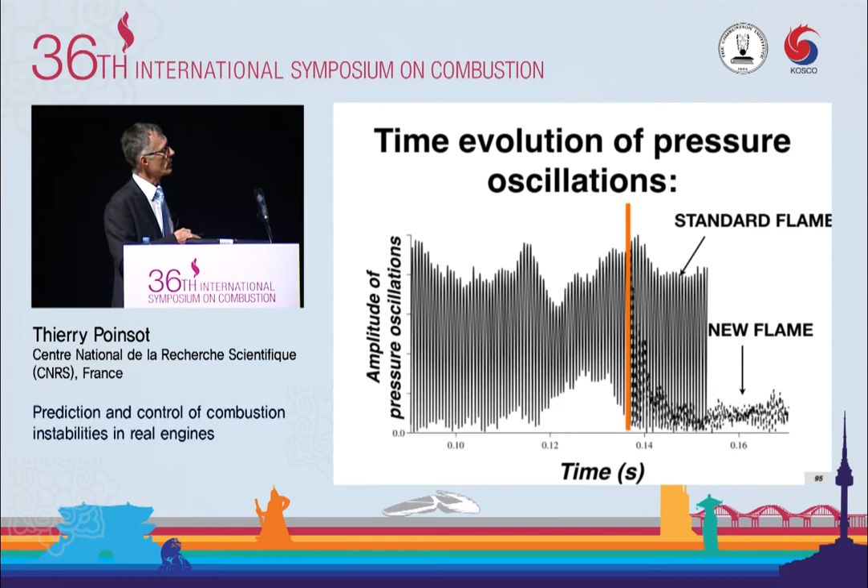And then we got to the point where, you can see time here, you can see the pressure—with the standard flame you see oscillations here, and when we went to this modified flame, the oscillations died really fast.

And actually, if you look at a movie of what's going on here when we change the chemistry, you see these very large oscillations, and you see that they are damped, and now they are completely gone.

So you see how we can combine theory and LES to try to understand how to control these flows. It's not the only thing you can do, actually.

I want to take now another example and another analogy. You know that if you walk on a bridge, it's probably not a good idea to have people walking at the same pace, because you're going to excite the structural modes in the bridge. It's actually forbidden in certain bridges to do that. It's the same in an engine.

Why do we use all similar burners? It doesn't look like a good idea. We should use different burners—all of them could be different.

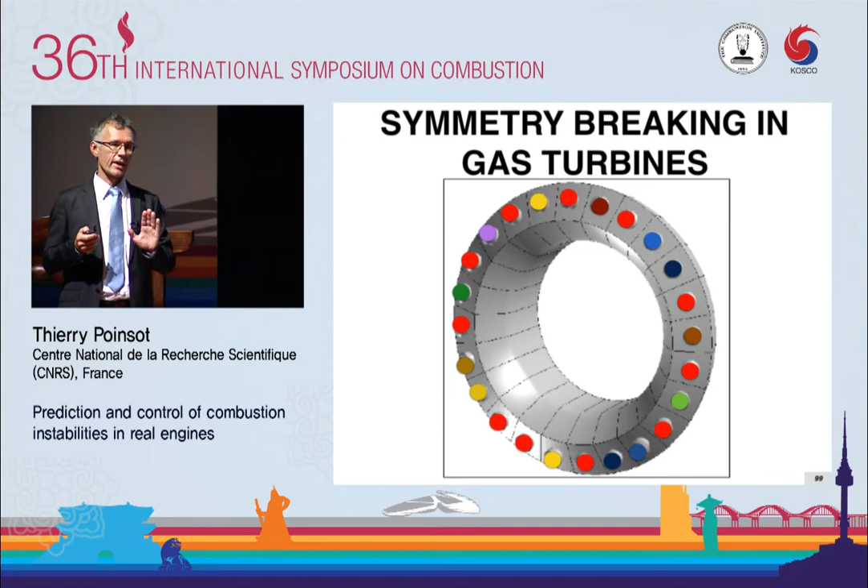Today, I want to do only one case, which is where we have only two types of burner, which I will call burners of type 1 and burners of type 2. Why do I use this case?

Well, because in practice this has already been done by Siemens. Siemens takes standard burners and adds some metal extension here so that these burners have different flame transfer functions. So in practice, you can call those type 2 and those type 1.

So now the question is, can we mix those things in such a way that we have better stability? The problem is there are so many ways to do that—you're not going to try all of them experimentally or numerically. You need a guideline, and this is where theory comes into the picture, because theory can help you to do that.

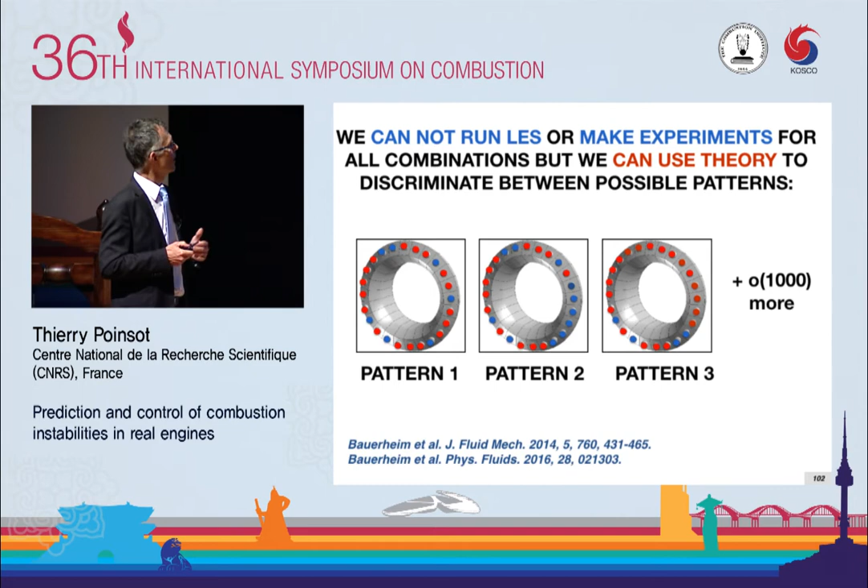Theory tells you that now, since you have two types of burners, you're going to have two gamma I's, two interaction indices for this type of burners. And theory gives you actually the form of the modes.

This is the result of the theoretical approach here. You recognize what we had before—this is the mode you obtain when you have identical burners. Now that the burners are different, you have a correction here, called S, the splitting strength. The splitting strength makes these two modes different now—they don't have the same growth rate, and they don't have the same frequency. Once you have the theory to guide you, you can apply it, for example, to do the following test case.

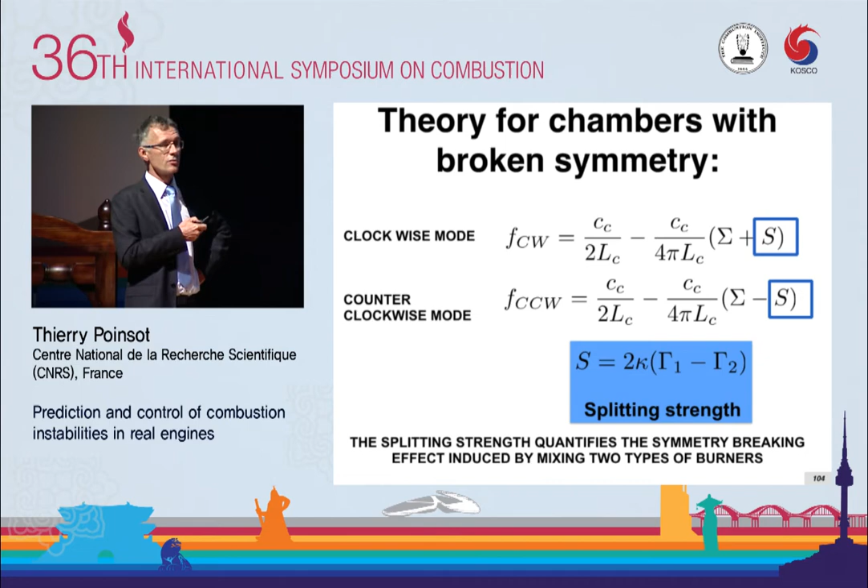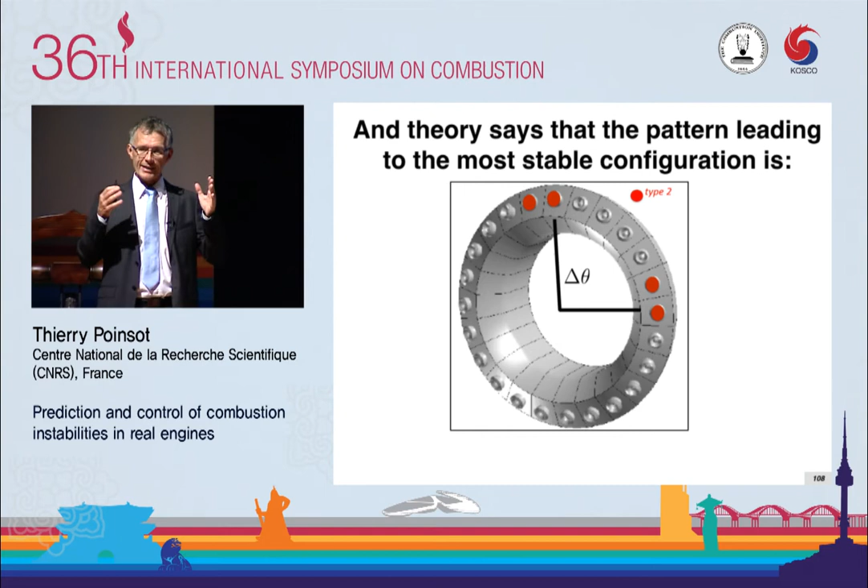Suppose you have a chamber where you want to place 4 burners of type 2 and keep 20 burners of type 1, and suppose also that for practical reasons you want to group them 2 by 2. Now you have only one parameter to choose: what is the angle between these two things. Well, you can run the theory, and theory tells you that the best arrangement, the most stable one, is this one. So there's no need to try all of them, at least you have an idea that this should be the best one. Then you can go to LES or to experiments, and you have a way to avoid trying to test all possibilities, which would be impossible anyway.

Okay, let me continue now with the rockets.

Now, this is a joint study also between different groups in Europe: Cerfacs and IMFT in Toulouse, EM2C in Paris, DLR in Germany, Onera, and TU Munich.

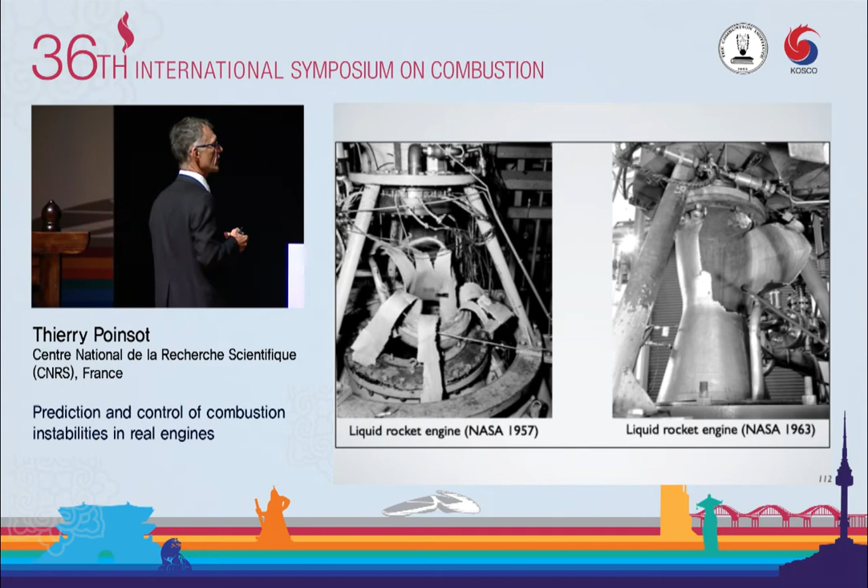The problem with rocket engines, of course, is that the power density is so large that when anything starts going wrong, you kill the engine very fast. And this is not what you want to do, of course. So you need to find a way to understand what's going on in these engines. Doing experiments, obviously, is difficult. If you want to study this engine, bring it into the lab, it's going to be crazy. And this is the argument we use quite often to say, okay, let's do a simulation. But the problem is that simulations are also very difficult.

Why? Well, because the flow in these rocket engines is a little bit tough. Not the injector itself, the injectors are simple, those are the coaxial jets I've shown you before. But the thermodynamic conditions are complicated.

Why is it so? Well, if you look now at a PT diagram here and an injector here where you inject nitrogen, you see that if you are at low pressure, you basically go from this point here to that point here, which takes you here in the PT diagram. And so basically what you have is a spray because you cross the boiling line here, and so you atomize your spray. That's what you expect to do.

But when you go to high pressure, it's different. Now you can go from this point here to that point here without ever crossing the boiling line. Which really means that what you have now is a transition between a dense fluid to a light fluid. And you can do that in an LES, but there are many problems here.

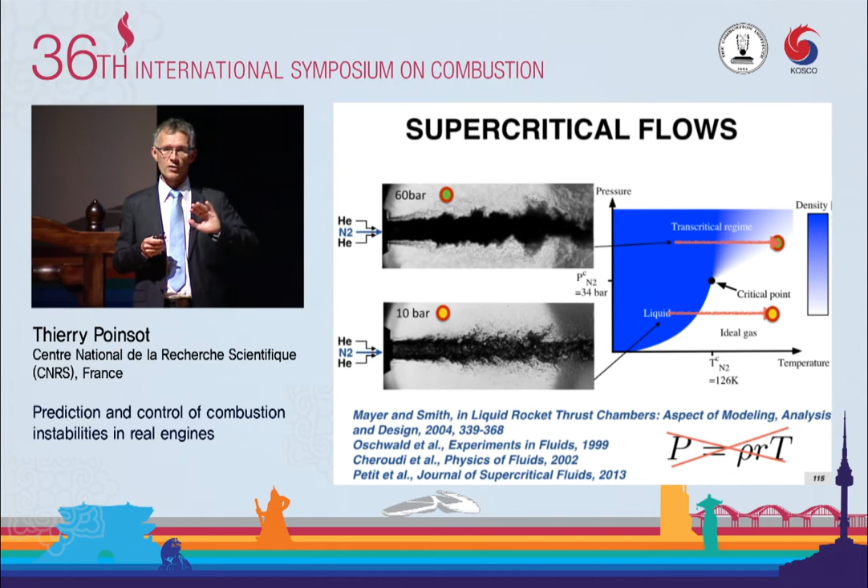The first thing is that you have to forget about the state equation. The perfect gas equation has to go away. You need another equation, but that's not the worst problem.

You can do that. The worst problem is really that in this flow now, you have one fluid with a density ratio which is more than 500. And numerically, this is very difficult to do.

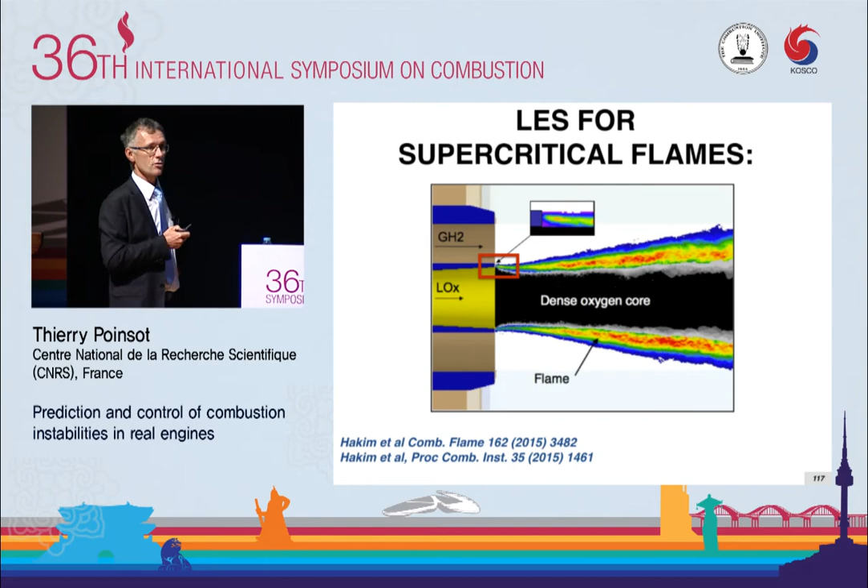You can add combustion. For example, here if you look now at a case where you have combustion, you have liquid oxygen and gaseous hydrogen on the other side. And you can do a simulation of that with reaction.

And again, I'm not going to follow this path because when you do that, you never find any instability. It's always, thermoacoustically speaking, these things are always stable. And we know now why. We know that this is due to the fact that to capture instabilities in a rocket engine, you need multiple injectors.

So what does multiple mean? Well, more than one. But in the real engine, you have 500. So you have to stop somewhere.

Well, the problem is that when you add injectors, the power goes up very rapidly. And remember, those are 80 bars experiments, so it's not a cheap game here.

So you need to increase the number of injectors. Well, that's what DLR did - DLR went to 42 injectors. To go to 42 injectors, they had to make them smaller. But even like this, the power of what I'm going to show you is 100 megawatts. So I'm not sure we can really call it a lab scale experiment - it's not something you would do in a university that easily. Also, because now the scales are smaller, the frequencies are going to be higher. You're going to see numbers of the order of 10 kilohertz just because they had to scale down this engine.

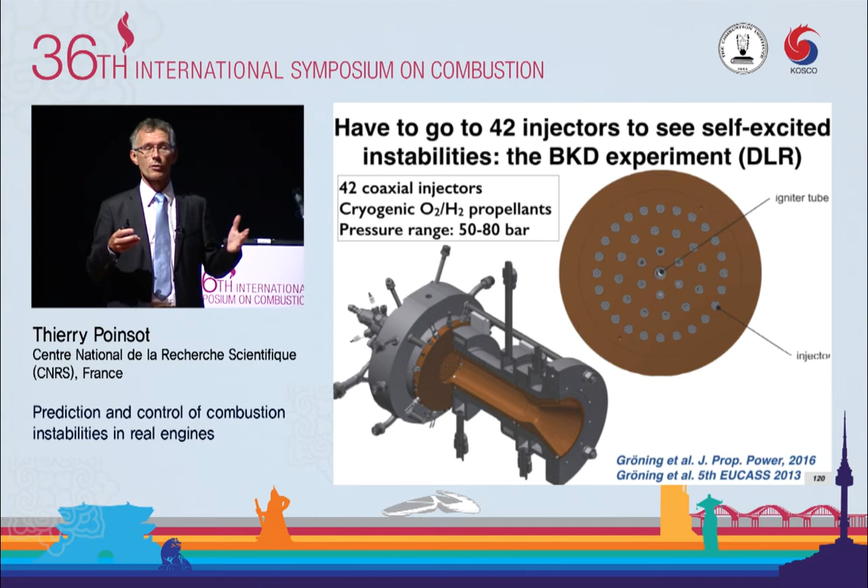So this is how the engine looks like. This is oxygen, hydrogen. So right away, you guess it's going to be dangerous. You have to do that in Germany, and you have to be careful. But even in Germany, I think they are afraid of this animal.

So you have a nozzle here. You inject the H2 and O2, and with this dome here, you're able to mix them with these 42 injectors. Each injector looks like this. You have the liquid oxygen here, and the hydrogen is injected there.

Now, the database which was gathered by DLR is a big one, of course. I just wanted to take 2 cases to show you that we can indeed, with LES today, explain what's going on in the engine and capture these instabilities. So we picked up 2 cases. One will be called low power, and it's what we call a stable case. The other one is unstable, and it's a high power case.

Now you have to understand that when these guys say stable and unstable, they really mean stable, maybe we could use this engine. Unstable, it would explode, okay? Because here, the unsteady pressure will be of the order of 40 bars peak to peak, and the mean pressure may be 80. So you can imagine the structure, if you have a 40 bar oscillation, it's not going to survive for a very long time. I would even say it's not going to survive at all.

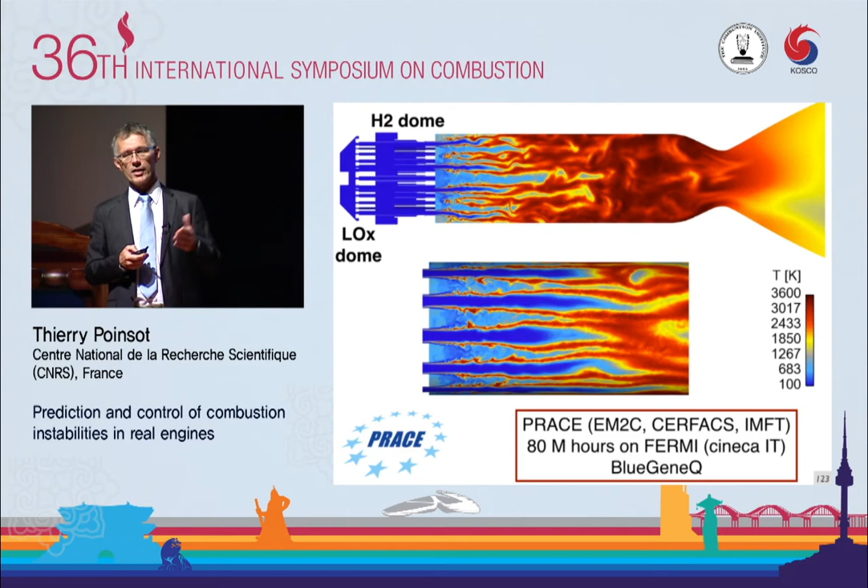So we did an LES, and again, that was a big game here. You can see the 80 million hours needed to do this computation. And this is the result of the LES. Here you can see the temperature field. You can see all the injectors here and the flows through the nozzle. And when this LES was done, it took a few months.

And then after that, the result was, what about instabilities? Again, remember, we are looking for instabilities. Well, there was no instability. So people gathered and thought about it, and we saw 2 possible explanations. The first one we did not like was that the code was not good enough, okay? That it was dissipative, and that it had a problem with the mesh density.

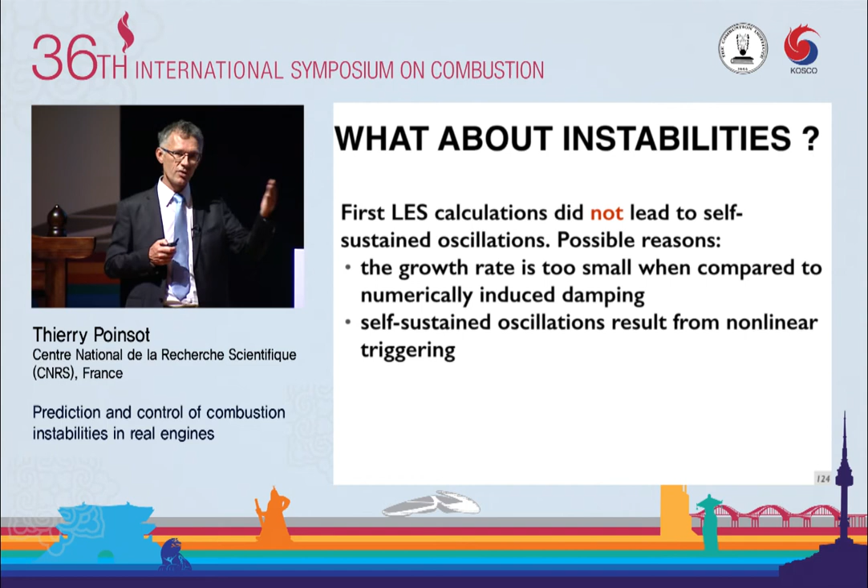So we checked the mesh independency. We found that the results did not change with the mesh, so we thought we should investigate another explanation. The other explanation is that maybe these oscillations are not linear. They need some push, they need some triggering to begin. You know, there are many systems which work like this. They are non-linearly unstable. You need to push them.

And so this is the explanation that we tried to investigate by adding a perturbation on the flow. This was done in the following way. We knew from DLR that the mode which appears in this system is usually a transverse mode, so we added the transverse mode at one instant, and only at one instant. We don't do that over time. We take the flow, we stop it, we add this perturbation, and then we let it go.

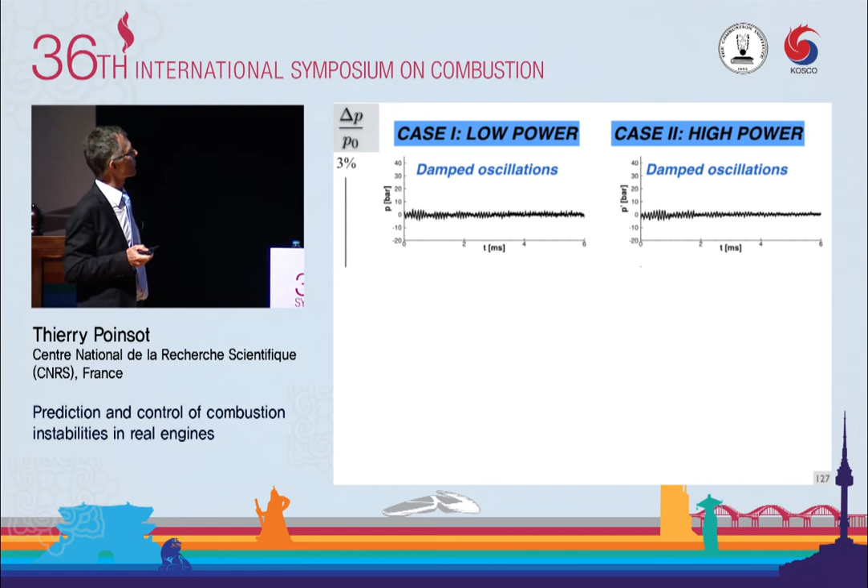And we scaled this forcing by the mean pressure, and we went from 3% to 13%. So when we do that, we obtain the following results. When we try to force at low amplitude, the low power case, we added some perturbation, but then they died right away. And same thing for the high power case. So we said, okay, we need more power maybe, so we went to 6%. And for 6% it was the same actually. When we force the system, it goes back to stability.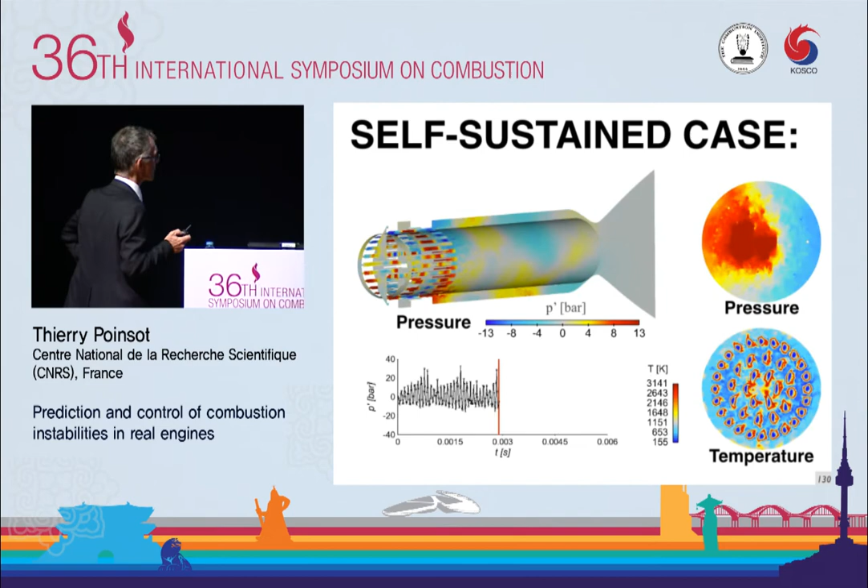Mode 2 was actually called mode X by DLR at that time because they were not quite sure of the nature of that mode, and you're going to see here that with LES we can actually explain where this mode comes from. So what we did, you need to take quite a few of these snapshots, maybe 1,000 of them, and you do DMD again on this thing, and you can isolate the modes.

So for example, this is mode 1 only. And you see that mode 1 only is a transverse mode in the chamber between these two walls, and a longitudinal mode 3/2 in the dome, in these lines here. And it's a coupled mode. It goes together. So we can really identify this mode, and the frequency is the right one observed in the experiment. And then we can also capture the second mode.

And the second mode is actually a radial mode. It does not have a dependence on the angle. It's located really here in the chamber, in this zone. And this mode now is again a coupled mode where you have a transverse mode in the chamber, a radial mode in the chamber, and a longitudinal mode in the dome, but higher order.

So again, it shows here that if you combine the LES and the experiment, you can isolate things which are happening in the real engine. And if you want to know more about that, there's a paper tomorrow which will give much more information on this problem. Okay, I'm almost done.

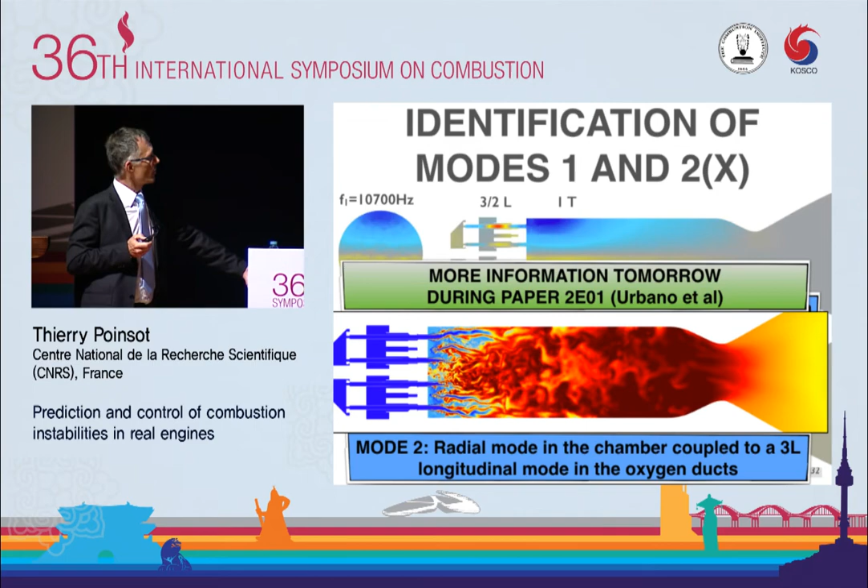I just want to finish with one thing, which is an anecdote, or a short story about something which is called intrinsic instabilities. If you followed my talk, you will have recognized that I have designated reflection, acoustic reflection, as the most important and the guilty phenomenon in all this business.

In other words, I've told you, if waves are reflected at the outlet or at the inlet, we can have combustion instabilities. That really tells you that one way to mitigate these instabilities would be to suppress acoustic reflections or to make them smaller. And that tells you that if you can cancel this wave here or make it smaller, probably you will be able to stabilize your burner.

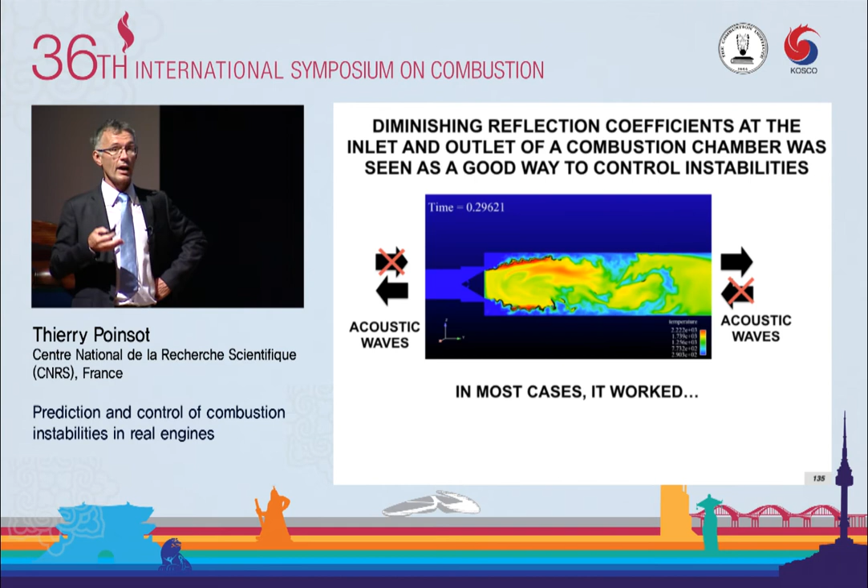And this method has worked for a long time. This is what everyone has been doing in industry and in the lab for a long, long time. And in most cases, it worked.

Let me give you one example here, which is a computation. In a computation, if you have characteristic boundary conditions, it's quite easy, actually, to master the reflection of acoustic waves on the boundaries. So we did, for example, this chamber here, which is another industrial power turbine.

And here you see the flow coming from the left. You inject methane by 6 holes here, and the chamber is here. It's a swirl flow. And again, you recognize that these guys in industry are not afraid of complex geometry. This is not a simple one to compute.

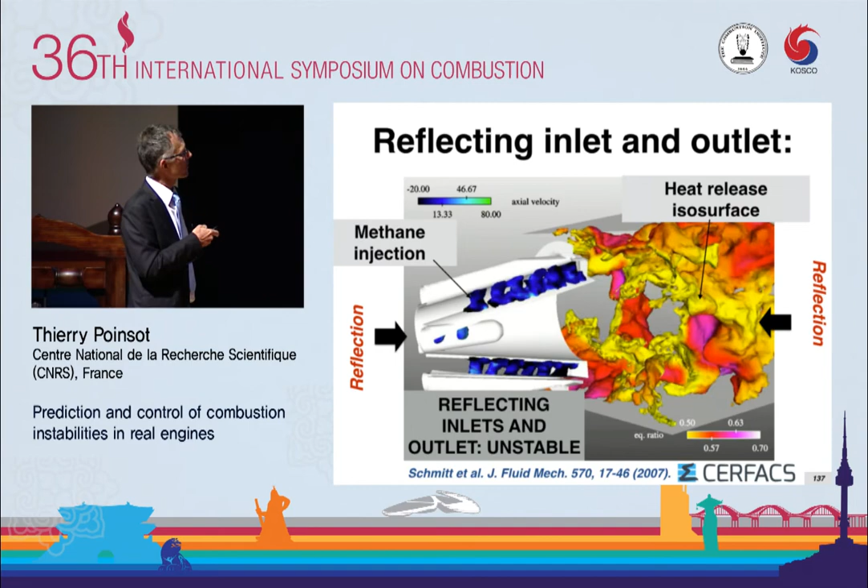When you do simulation of this engine with reflections at the outlet and at the inlet, you see this thing is really working like a pulse combustor. Here you recognize the jets of methane which are pulsating. You inject, and then you burn. And you inject, and then you burn. Really, it's something you don't want to do in a real engine. It's too unsteady.

Now, if you just change the outlet conditions here, make them non-reflecting, then it gets completely stable. So that's a good suggestion that a good way to mitigate these problems is to increase the damping. Whatever the acoustic waves do, they should not come back.

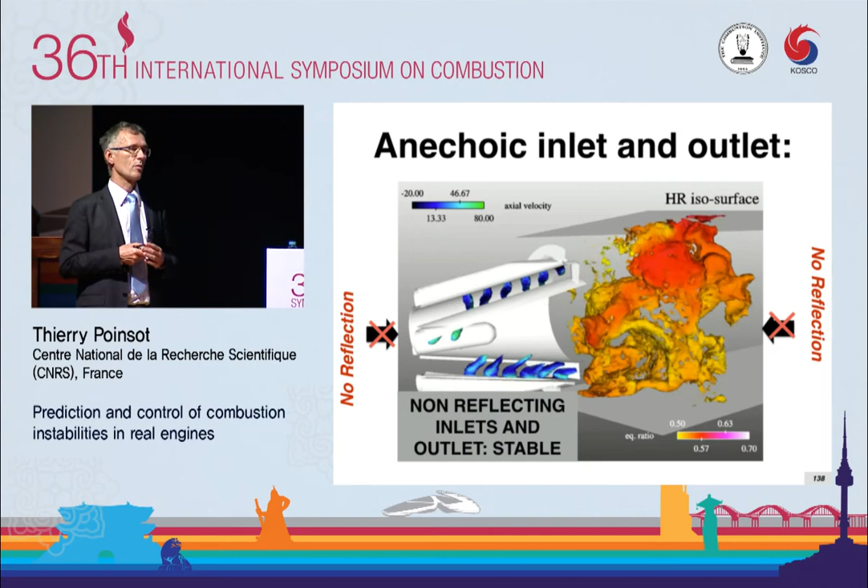And so the community everywhere, industry and academic, has been thinking along that line. Now, less than two years ago, TU Munich and TU Eindhoven came out with papers submitted to Combustion and Flame and the Symposium, saying that they revisited the basic theory of thermoacoustics, and that probably a lot of people forgot something for 50 years.

They said there's another solution to this problem: you can have an unstable mode in a fully anechoic chamber like this one, with no reflection at all here and no reflection at all there, and you will still have an unstable mode. And that was the result of the DNS, because it's a simple Bunsen flame.

So when the paper was submitted, a lot of people got angry, saying it cannot be right, we should know about it. It's really surprising. In Toulouse, we repeated almost the same simulation as Munich, and we found the same thing. So we said, they may be right, actually.

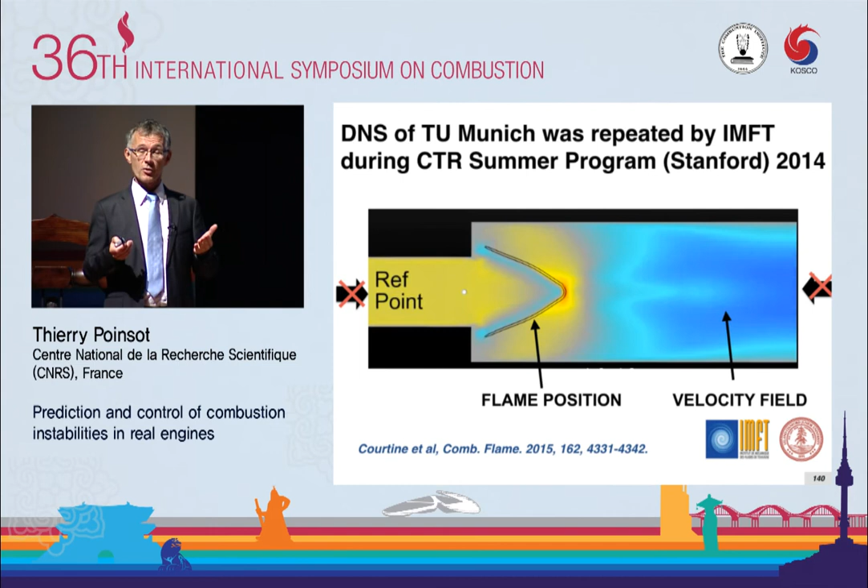And today, after many discussions, I think people understand this problem, and we think the mechanism is rather simple. If you have a chamber like this one, you can have unsteady combustion here in the chamber, and right away a wave propagates upstream. This wave hits the place where the flame is stabilized, creates a new vortex, and this loop turns here without ever touching the outlet or the inlet, so you don't need reflection at either end to have a problem like this.

And actually, TU Eindhoven even did an experiment on this. It's very difficult to do because you need an anechoic inlet and outlet. You can see the horn they installed on their system at the inlet. At the outlet it's very difficult to be anechoic while you have hot gases going out. But even experimentally, they proved that you can have these intrinsic modes.

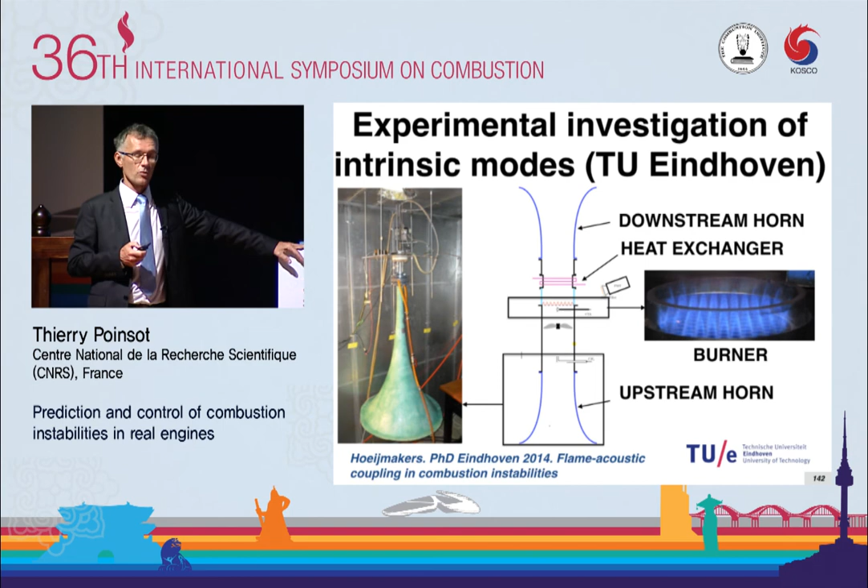So why did I mention that? Well, because in industry, in real engines, we've had quite a few modes over the last 20 years which do not seem to react the way we would expect. We increase the acoustic damping, but the mode is not damped. So that's probably because they are intrinsic.

There's a paper on this again tomorrow, and I encourage you to take a look at it. Just one more comment: when these intrinsic modes were found, they were not found by doing DNS or experiments. They were found because someone revisited the theory.

And probably the comparison is exaggerated, but think about fundamental physics—this is the way it works. There are theoreticians saying, my computations, my idea is that there should be a particle you should find if you do this, and then people doing experiments look at it. It's the same here—we started looking at these modes because people revisited theory.

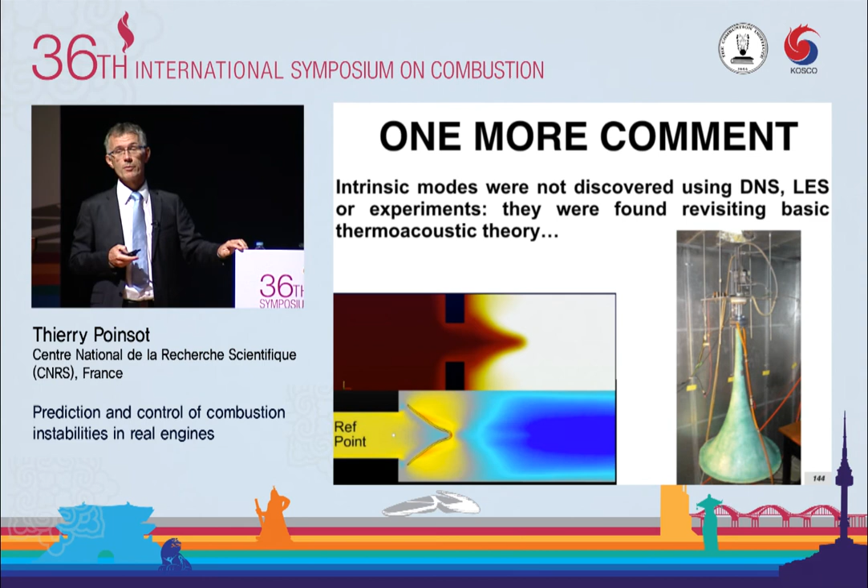And again, the message is the same: we need theoreticians, and that's a message for the young people in the room. So I will conclude now by saying that combustion instabilities, I hope, have proved they are a major risk in real engines—not only a curious animal for research. And today we have a problem because we have a hard time predicting them.

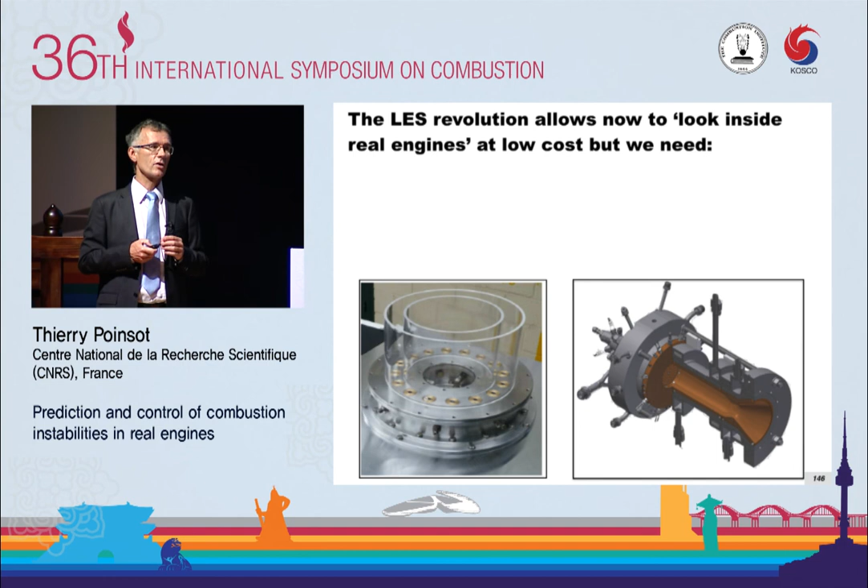It's a fascinating field of investigation, again for the young people in this room, because we need to combine everything: kinetics, unsteady flows, hydrodynamics, acoustics, heat transfer. Now, the LES revolution has been very strong in that field, but we should not believe that having an LES, which allows us to look at the flow field, gives us the solution to all problems.

We still need experiments, and we need experiments which are targeted to look like the real engine. It's doable—you've seen the Cambridge experiment and the EM2C experiment. And also, of course, I hope I've convinced you that we need more theoreticians looking at the problem. And on that, I will conclude and thank you for your attention.